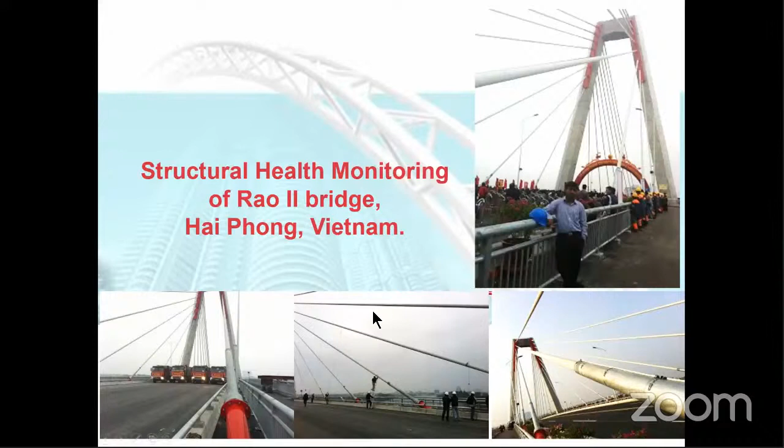The few projects I've listed are the structural monitoring of Rao II Bridge in Hai Phong, Vietnam; the online monitoring system for the Golden Horn Bay Bridge crossing, Russia; health monitoring of the Neva Cable Stay Bridge, St. Petersburg; the new Mariinsky Theater in St. Petersburg; and the Crusell Bridge in Finland.

A few projects in India are the load and periodic monitoring of road bridge OB161 in Baramulla, Jammu and Kashmir, and structural monitoring of a steel truss bridge that is 120 meters span at Bangalore, Karnataka, as well as load testing of the viaducts of metro projects to evaluate dynamic augmentation coefficients.

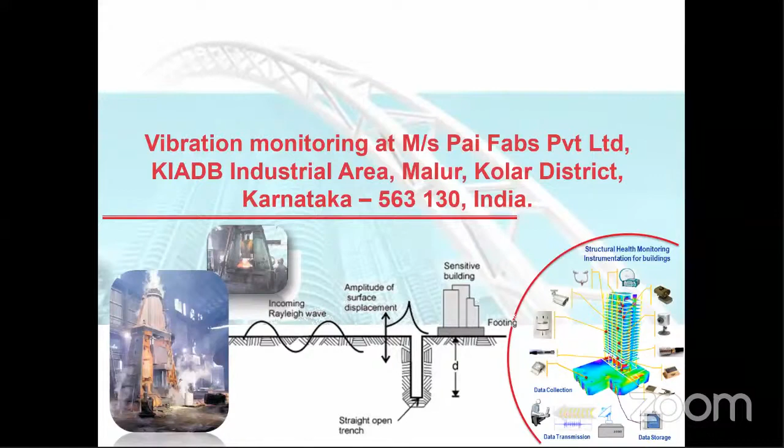Various other vibration monitoring projects in industrial areas like Kolar, Bellary, and various other places in Karnataka, plus a few measurements abroad related to human comfort.

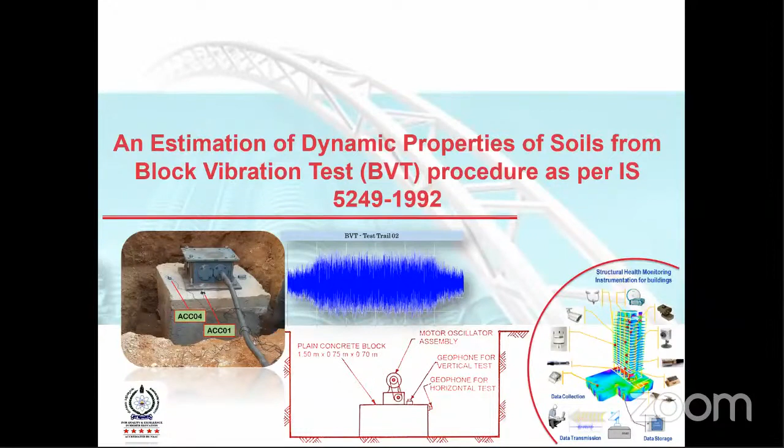Then a few research studies have been conducted at various universities. I've also been a consultant for academic works on free and forced vibration of various specimens, and a few projects on estimation of dynamic properties of soil and vibration related to soil and geodynamics.

These were a few of the projects which I could list, and if there are any clarifications or suggestions required from the participants, I would be happy to share, not just limited to this presentation, but on those projects also.

Today's presentation is on structural monitoring of a bridge, specifically the case study of the significance of monitoring temperature and humidity. The outline is: introduction, structural health monitoring, benefits of structural health monitoring, and the case study on significance of monitoring temperature and humidity, followed by some closing comments.

Although the outline looks very simple, my presentation is going to go at least 2 hours long. I hope your hosting organization and department organizers would accept such a long presentation. If at any point they require me to end, kindly let me know, and I will definitely wind it up at the earliest.

Now, as we all know, the civil industry is evergreen and ever growing. We basically build what we call the living companions to all. Now, during this COVID situation, you would have understood that the only thing that is going to be forever immortal is our civil industry, because your building is going to stand, but humans are always mortal.

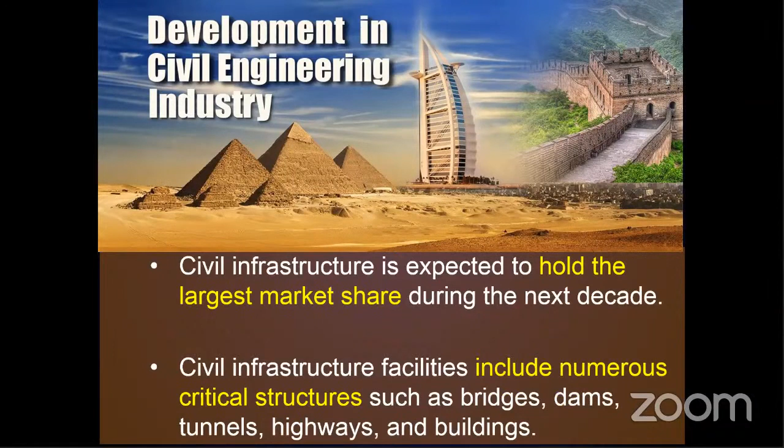Civil infrastructure facilities, as we all know, can include numerous critical structures, such as bridges, dams, tunnels, highways, and buildings. Now, in the construction industry, presently we're in a state wherein, because of the rapid urbanization, there is a need for new construction, and there is a need for retrofitting the existing structures. Basically, we either need to construct new ones, or we need to take care of the aging infrastructure.

Now, as we all know, we've been professors, we've been explaining students on most of the modern complex designs, and the structure being so complicated with a lot of materials inbuilt. So as we all know, the recent development in technology has enabled the modern construction of structures that consist of most complex design, such as complex geometry and conditions, incorporating complex systems such as control devices, composites, built with advanced material quality and supported with sophisticated analysis, design, and rapid construction.

And all these modern constructions or modern infrastructures are subjected to aging, and also subjected to traffic volume.

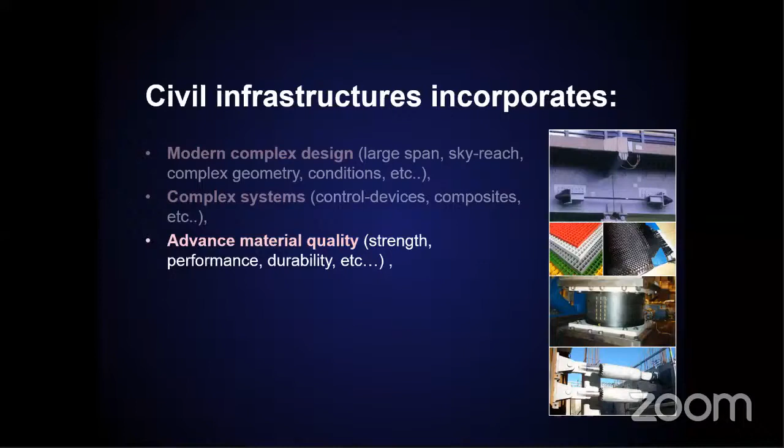I think... you can mute him. Yeah, okay, he has muted. There is audio a little bit low, it seems. Please check your audio. Is it okay? Yeah, fine, let me check on that. Yes, sir, is it fine now? Is it fine? Now it is okay. Yeah, fine.

So we've been able to construct the tallest buildings and the large span bridges. So almost we are reaching to almost 2-3 kilometers span of the bridge.

Now, as you all know, the globe is getting hotter day by day, and the temperature is rising. This is attributed to global warming and climatic change. This is the present day talk.

Now, it is necessary for us to know the terms weather and climate, and these are quite different. Weather events are defined as the state of the atmosphere in a particular location at a particular time, whereas climatic change includes major variation in temperature, precipitation, wind patterns, and other environmental conditions that occur over several decades or longer. It takes more time. So that's the climatic change.

Now, the climatic change is the cause for the structures to be affected, and the climate is changing because of the global warming. The change in climate and weather are linked over the long term, but no single weather event, such as what we had recently, the tornadoes or the cyclone, can specifically be attributed to the changing climate. So that means a single weather event cannot dictate the climate, basically. It takes a long time.

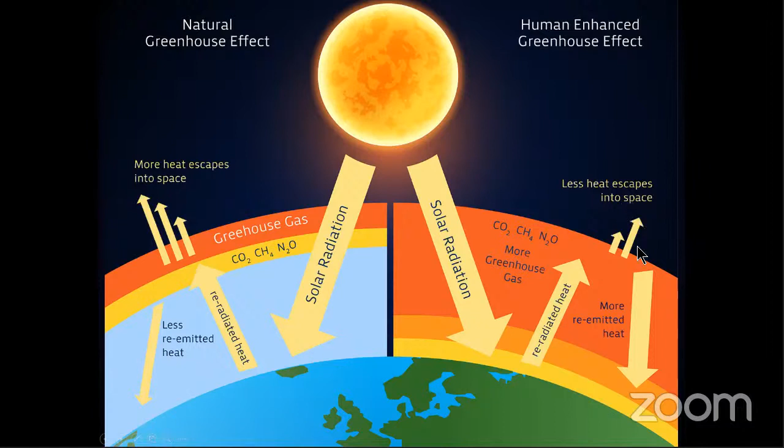The slide will give you a complete picture. On the left hand side is the natural greenhouse effect. The right hand side is the human enhanced greenhouse effect, because of the various greenhouse gases. So the increase in greenhouse gases means there is less heat that escapes into space. Thereby, we have more global warming.

Arrhenius was a scientist who, in 1896, speculated that changes in the levels of carbon dioxide in the atmosphere could substantially alter the surface temperature through the greenhouse effect. He warned that if burning coal doubled the concentration of carbon dioxide in the atmosphere, the temperature of the earth could rise by several degrees. That was the day we got to know the definition of the enhanced greenhouse effect.

Sunlight passes through the atmosphere and warms the earth. Infrared radiation is given off by the earth, and most of it escapes to outer space, allowing the earth to cool. But some infrared radiation is trapped by gases in the air, such as carbon dioxide, keeping the earth warm enough to sustain life. Increasing carbon dioxide increases the amount of heat retained, causing the atmosphere and the earth's surface to heat up. So this is all about the greenhouse effect and the enhanced greenhouse effect.

This causes a problem of climatic change due to global warming. Every sector, industry, or organization is contributing to the greenhouse effect. According to the WHO, a carbon footprint is the measure of the impact that any activity—by a sector, industry, or organization—has on the amount of carbon dioxide produced through the burning of fuels, expressed as the weight of carbon dioxide emission produced in tons. So the sector contributing to the greenhouse effect can be measured by its carbon footprint, based on its carbon dioxide emissions produced.

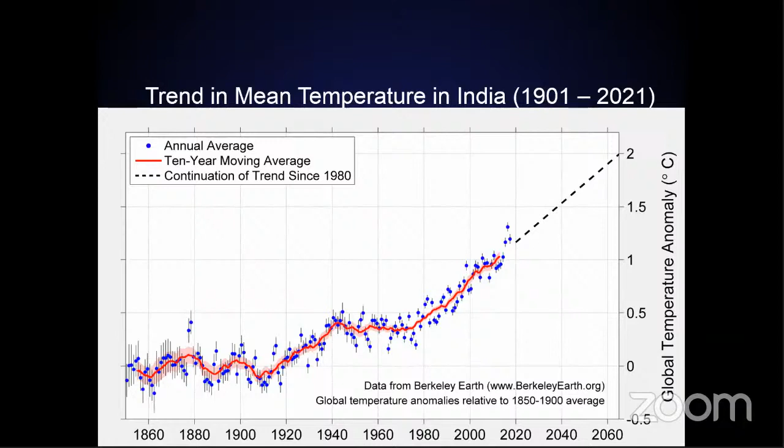Because of the carbon footprint and the increase in carbon dioxide, we've been seeing a constant trend of increasing temperature since 1900. This graph is taken from the Berkeley Earth organization. You can see the temperature has been constantly increasing over time—this is the trend in India.

This is relevant to my presentation, because this basic understanding is important since we are into structural health monitoring. In health monitoring, it's not just about finding how much change has happened, but also getting into action mode—diagnosing the problem and then suggesting something. So understanding why the problem started is of prime importance.

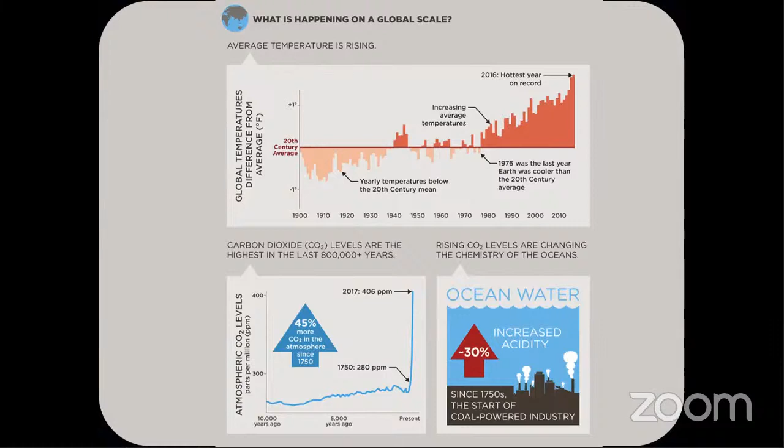Because of the enhanced greenhouse effect, the carbon increase, and the carbon footprints of various sectors, we have a rise in global temperature, which leads to various effects. On the global scale, temperature is increasing, carbon dioxide is also increasing as a major pollutant, and there is an increase in acidity in the ocean water.

As you all know, we are in the present day COVID situation, which is presently being declared as airborne. Now this is going to affect the region, and there is going to be a risk for various sectors - environment, economy, and health sector also. There is going to be a huge increase in the risk involved in the cost, and this would be ever growing.

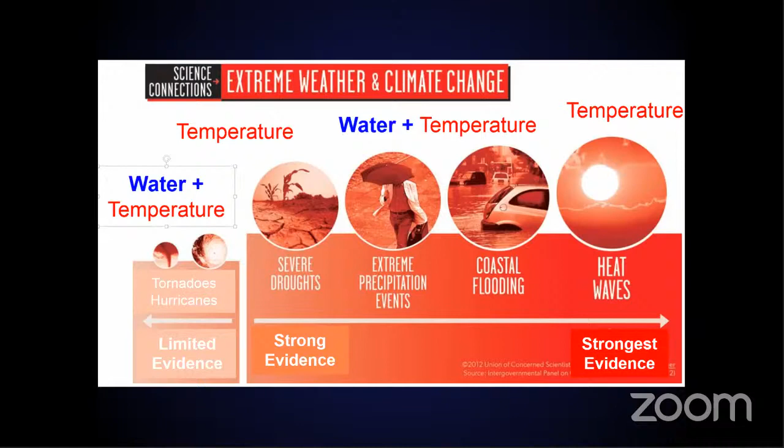Now, most of you would know the definition of a structure. We can take any structure, not necessarily a civil infrastructure - it could be a mechanical or aerospace structure. All are affected by the temperature.

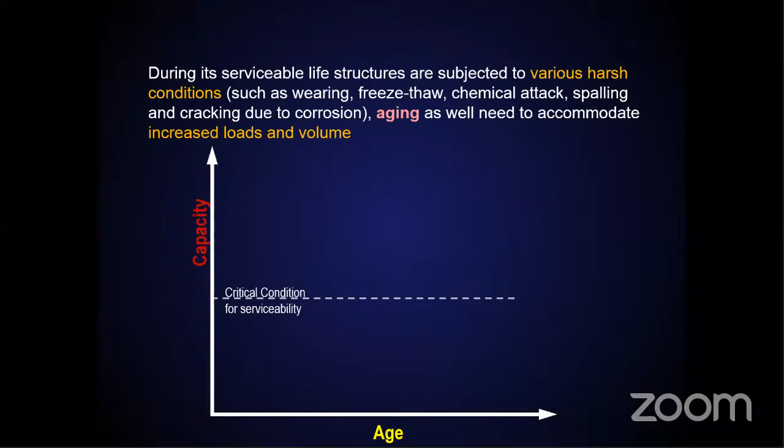The loads clearly show a tendency to increase over the lifetime of the structure. However, if the applied load increases continuously, the deterioration would occur faster. So if the load is increased in an accelerated way, the deterioration is also going to be accelerated, or faster.

As you all know, the load is never constant, the capacity is never constant, because the capacity decreases with age and also with the rate of loading, and it is always changing. Whereas the load is always variable, it's totally uncertain.

So whenever there is variability and uncertainty, these parameters of uncertainty or variation can be best represented by the probability distribution. So the probability distribution curve, if you take at any point...

As time progresses, the demand exceeds the capacity, and it is evident that the time-varying probability of failure increases.

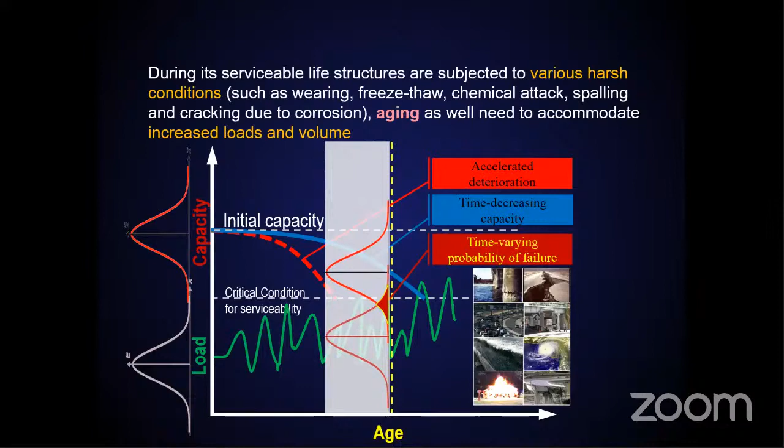As we all know, the design must guarantee the performance, that is the functionality, strength and durability, which is dependent on time. And structures in general are intended to perform safely during their design period.

When it enters service, it is close to perfect, or in agreement with the engineering expectation of the day. Over time, the structure loses part of its initial capacity. As you can see, there is a cumulative damage over a period of time.

When the structure is found to reach a limit of acceptable minimum performance, as determined by routine inspection done by the structural managing team, it has to undergo repair to recover its initial capacity. If this point is neglected, the structure would basically be decommissioned, or it won't be performing well.

As you all know, every structure once in its lifetime should be subjected to some type of extreme event, such as an earthquake or other extreme events. After an extreme event, it is again inspected and retrofitted, and the same cycle repeats. That means after the retrofitting, there will again be cumulative damage, or deterioration of damage.

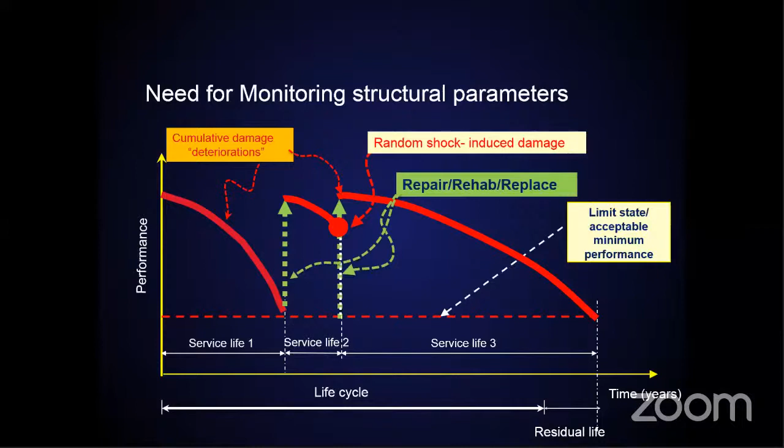As you can see, there is numerous uncertainty involved in every phase. So what is that uncertainty? The X and Y parameters. If you look at the X and Y parameters, you are not definite at what time the rate of deterioration would lead to the decommissioning of this particular structure.

On the Y-axis, we have the performance; we are not aware up to what point it will perform after it is designed, and the rate at which it falls is also uncertain. There is total uncertainty. So in order to extract knowledge or understanding of how this deterioration takes place, there is a need for information.

This information is basically obtained from data that are collected from these structures.

In the present day, there is reactive-based maintenance, which is still a reality. The preventive, or time-based, or condition-based approach is still not being practiced fully. In a few cases it has been practiced, but it is not completely practiced.

The predictive or forecasting-based approach is still the need of the hour. So all this predictive, forecasting-based, or condition-based approach is dependent on the data that is acquired and the information obtained in context with that particular situation. Therefore there is total uncertainty.

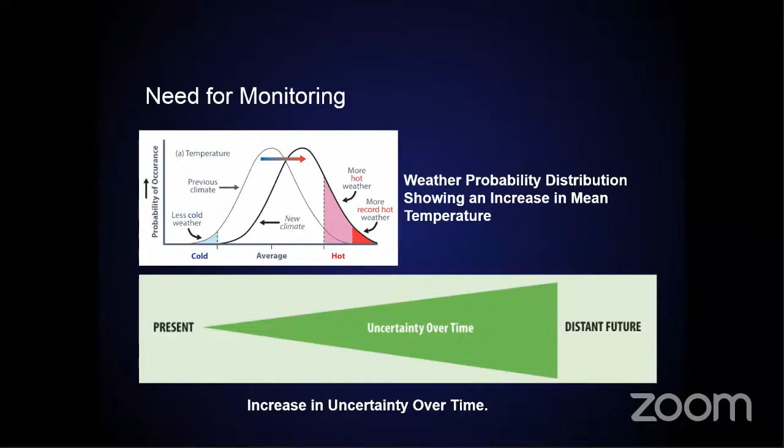As we can see from the slide, the uncertainty over a period of time increases if measured over a long period. The uncertainty of today would extremely increase over a period of time. So when you know these factors, this is a complex situation in civil engineering.

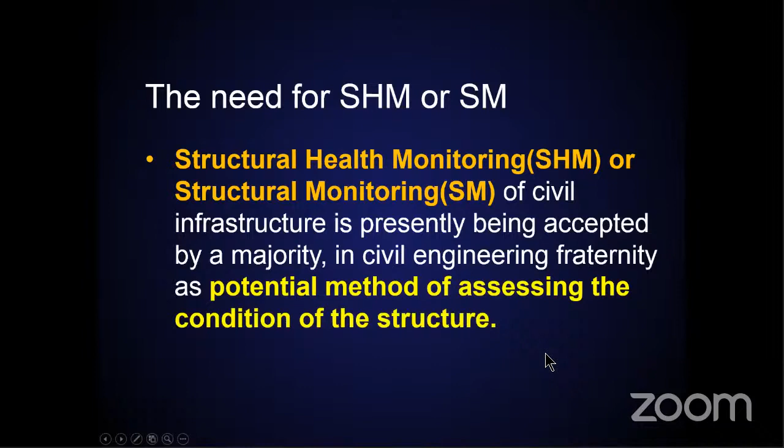Basically, it's presently accepted by the majority of the civil engineering fraternity as a potential method of assessing the condition of the structure. The development of structural monitoring technology is basically for surveillance, evaluation, and assessment of existing and newly built structures, and it has presently attained some maturity. That means extensive research has been conducted and it is being implemented on site.

And presently, people have been using, because of the low cost IoT technology that is being adopted in structural health monitoring.

For those people who are very new to the subject, the analogy is the process of acquiring and analyzing data from onboard sensors and measuring techniques to determine the health of a system. It could be as simple as monitoring the health of an individual.

Similarly, you monitor the health of your civil infrastructure. Nowadays everybody is aware of monitoring because we've been constantly monitoring people, and the media helps us monitor. Even if you're in a bad or good state, you try to monitor so that you remain in a positive state of mind.

As you know, there's a parallelism between medical activity and SHM—different phases of life. There's birth, and during birth you go for monitoring, called process monitoring. There's regular routine health checkup, whether you're in sound health or not, and the same type of monitoring can be done. When you're in deep illness or close to death, there's clinical monitoring, and similarly there's damage monitoring when it comes to structures. That's the parallelism between medical activity and SHM.

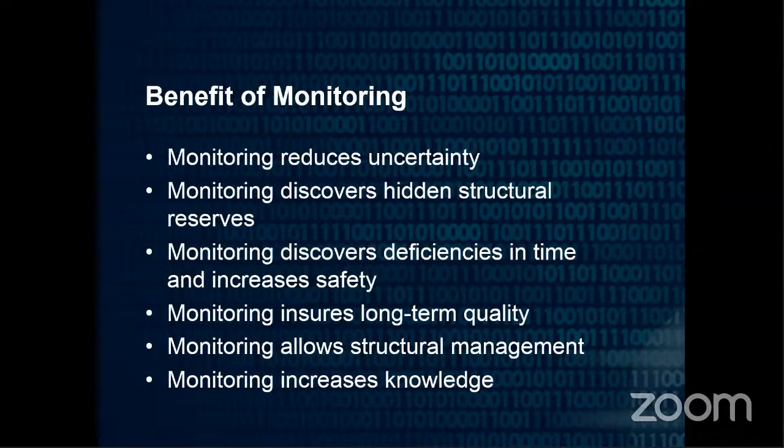Monitoring also increases knowledge, because you create a strong database for others to work on and develop their models, and share those models with academics to get into the practicalities and into codes of practice. So there are various benefits of monitoring depending on what you're monitoring, and these benefits can be easily seen when reading some articles.

Now the definition: structural health monitoring, or structural monitoring, is the technology-driven automated solution whereby sensing devices are installed and remain in place on a structure with the intention of capturing structural data on a continuous basis over time, for the purpose of objectively and accurately assessing structural performance. So we use sensing devices that are installed and constantly monitored.

Basically, structural health monitoring is the combination—it's called Civionics. It's a combination of structural engineering, civil engineering, with electronics. It includes structural engineering and data science. As you know, Civionics is a new term coined in 2003, applicable to the application of electronics in civil engineering.

Structural health monitoring can be applied for usage monitoring or operation loading, to collect operation loading data, health monitoring, and presence or quantity or performance variations. It could also be maintenance monitoring—reactive, corrective, prevention, or predictive monitoring. So whenever you have a maintenance program situation, you would call for structural health monitoring.

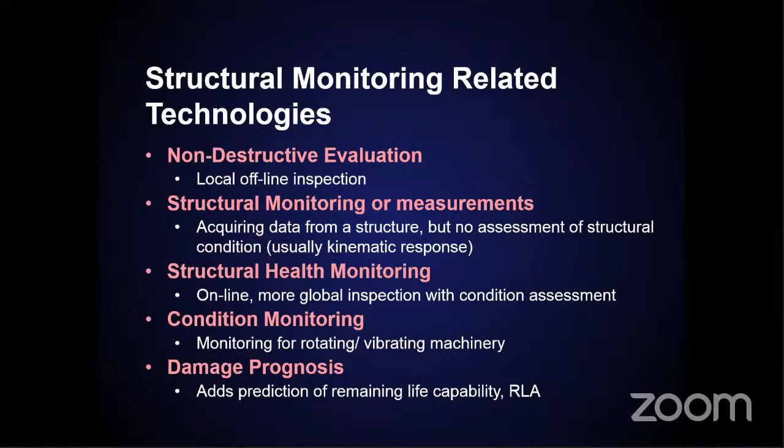Each monitoring project has its own peculiarities, and although it is possible to standardize most elements of the structural monitoring system, each application is unique in its own way, and they are combined. So the classification of monitoring is basically a combination of various things.

Since every project is unique and peculiar, you try to combine and make it a topic. Let's say, in the present day topic, highlight it as structural health monitoring of structures and the significance of monitoring temperature and humidity. That doesn't mean I'm an expert in the various other fields, or that I am aware of other things.

This particular field has its own wings, and the few people who have worked on certain projects could only talk on those projects and would be expert in that project. But it is quite a complex and vast subject. So whenever you get involved in a particular project, you try to know much on this, and it basically gives you a basic idea of the other monitoring schemes.

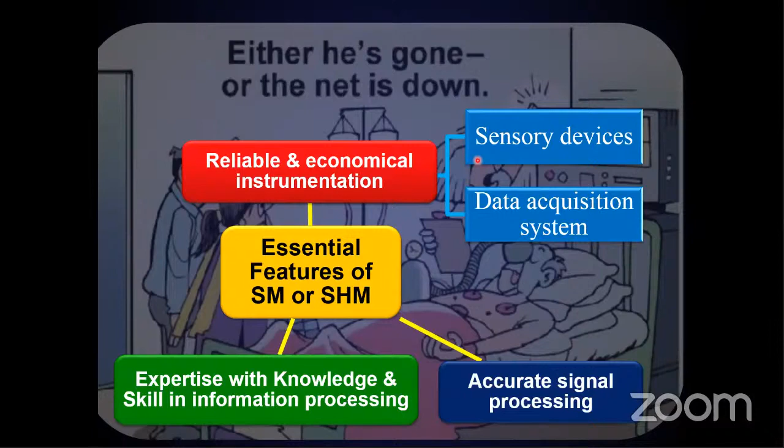Now, the components of the structural monitoring scheme - I would try to go fast because these are the basic things, so from henceforth I'll be a little fast. I'm getting back to my case study and I'll go slow over there.

As you can see, the modern structural health monitoring system will typically consist of six common components: the structure or system that needs to be monitored, the sensors placed onto the system, the data acquisition systems that acquire data from the sensor, the data transfer and storage, the data management, and the data analysis and diagnostics. These are the major components. From these components, we try to find, diagnose, and analyze, and then use that data to successfully provide the solution to the civil infrastructure.

And as you all know, the monitoring scheme is basically a networked, well collaborated, multidisciplinary activity. The monitoring system is a multidisciplinary system integration approach, wherein you have various components and hardware from various discipline fields that are integrated and combined to form one particular reliable system. So the success of the monitoring system or the monitoring technology depends on how well we have been collaborating with various departments.

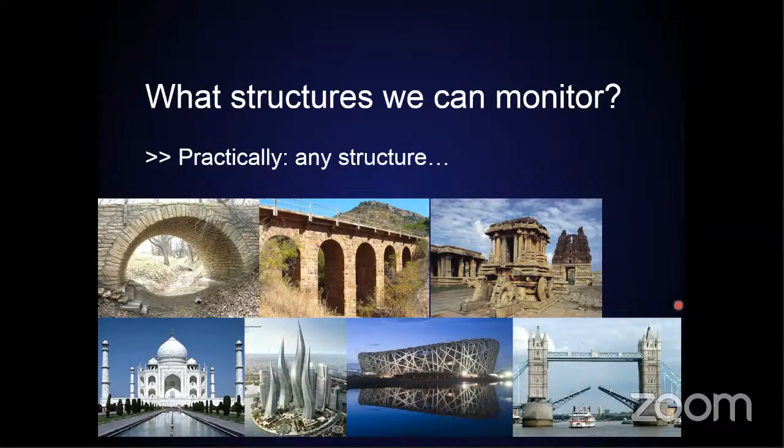Now the first component is the structure. Most of the questions asked is which structures can be monitored. As I've been presenting at various conferences, I've been told to define a few basic things, so I try to include this. Practically, we can monitor any of the structures, be it new, old, micro, macro, or any scale. It could be on Earth or in space, a single structure, a complex set of structures, the whole city, or anything - a temporary structure or a permanent structure. So practically any structure can be monitored.

At what stage do we need to monitor? As in the case of health monitoring, we can monitor at the happy stages, and when you're really worried, you go for diagnostics. And sometimes when you're critically ill or in a very bad state, you go for monitoring.

Therefore, by the same analogy, you can monitor structures at any stage - beginning from the design stage, model testing stage, construction stage, commissioning stage, in-service stage, maintenance stage, retrofitting stage - before and after retrofit, whether the retrofit is effective or ineffective - and the mobilization stage, when you mobilize one structure from one place to another, or lift structures from one level to another. You need to monitor every component of it if there are any stresses being induced, so you monitor before and after it's been mobilized.

Demolition - whenever you go for a demolition, you need to see whether the surrounding environment is affected, whether the structures surrounding it are affected. Therefore, you need to monitor before and after the demolition. So basically, in the life cycle of a civil infrastructure, you try to admit a few stages of monitoring.

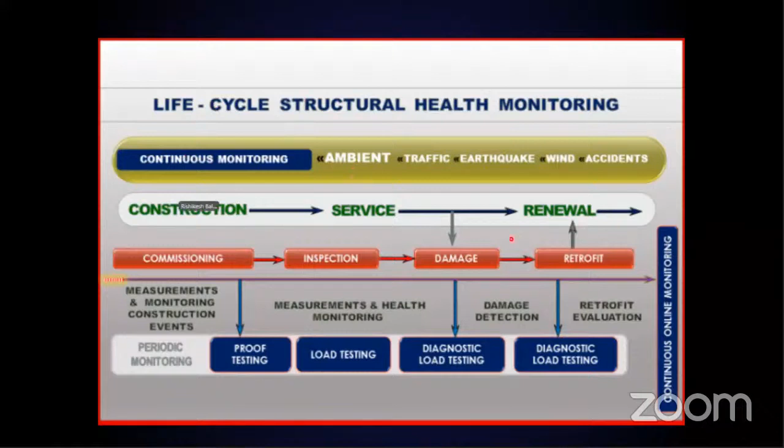Now, which of the components or sections of the structure need to be measured? You can measure the whole structure, or you can measure one component of a structure. When you're measuring the whole, you're considering the whole structure in your analysis - that's called global monitoring. When you consider a portion of a structure to understand its local behavior, that's called local monitoring.

The second thing is the sensors. Now, what is a sensor, or what are the types of sensors available? Electronics students are very much aware of it, and nowadays every individual is aware about sensors because you're using smartphones, which have got various sensors. So it's a device for sensing a physical variable of a physical system or an environment - that's a book definition of it.

And the sensors are there to collect the data. Now, the sensors sense the changes in the physical variable of a physical system or environment that could lead to damage. Now, understanding damage is very important.

Damage is defined as a change introduced in the system which adversely affects the optimum functionality of the system, either currently in use or in the future. So damage is basically a change introduced into the system which adversely affects the optimal functionality. Basically, the damage or system change is defined as a change in the material property, the geometrical property, or also the boundary conditions or system continuity, which adversely affect the system's performance. So the sensors sense the data, and the change in the data would define the damage - that's a basic definition of damage.

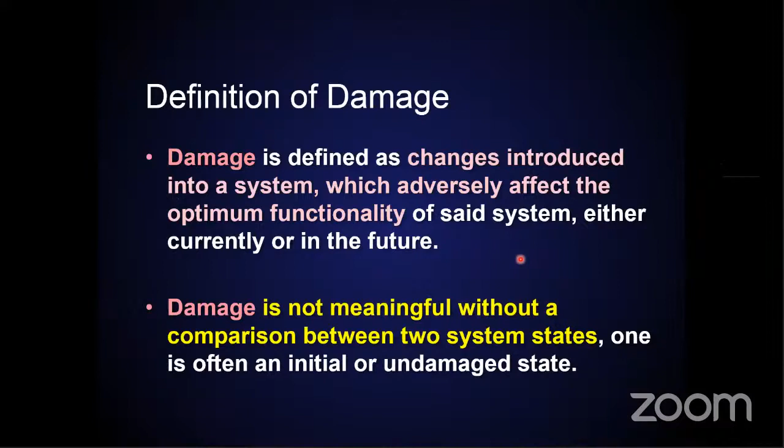Now, one must understand that sensors cannot measure damage. In the initial days, when we used to go for marketing or talk to clients, they had an idea that a sensor could measure damage and we could tell whether the structure is safe or not within a fraction of a second - once the sensor is in place, whether you can find if the structure is damaged or not. But this was the situation when I used to talk to my clients earlier, wherein we couldn't give an explanation, because if I give an explanation, I lose the project. If I don't explain, I'll be doing injustice to my job.

So as you all know, the SHM sector is still in the developing stage, because there is a need for a lot of skill sets to be provided. These seminars or webinars will always help candidates get the information and knowledge, and further when they apply it in their labs or work on some projects, they'll definitely understand what amount of skill set is required for structural monitoring.

So basically, the damage assessment is a feature extraction through signal processing, and statistical classification is necessary to convert the sensor data into damage information. That's very, very important. So we must know that sensors cannot measure damage, but the damage assessment is by feature extraction - we need to get the information from that data.

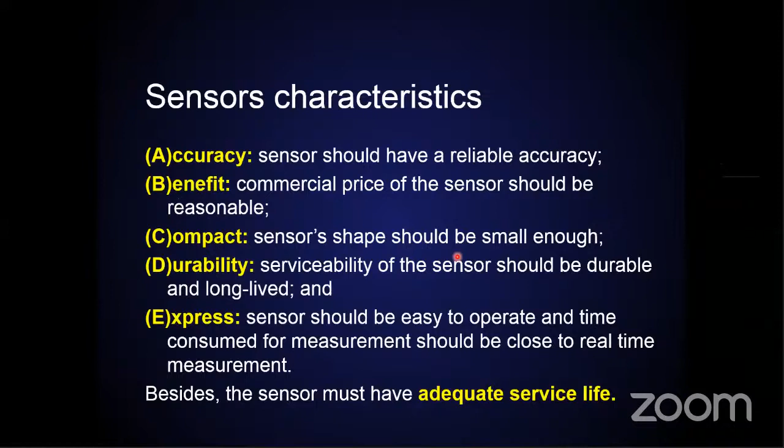Durability, the serviceability of the sensors should be durable. Express means the data operation and accuracy should be fast, high rate, and it should also provide real-time measurements. Once we are dealing with civil infrastructure, it will also have adequate service life equal to that of the civil infrastructure.

So the types of sensors available in the market can be classified as surface attached, which could be glued, bonded, or welded. It could be contact or non-contact. So basically, you have contact sensors which are surface attached, and some are embedded, or embedded at a specific region, such as the damage or where there's expansion or a crack.

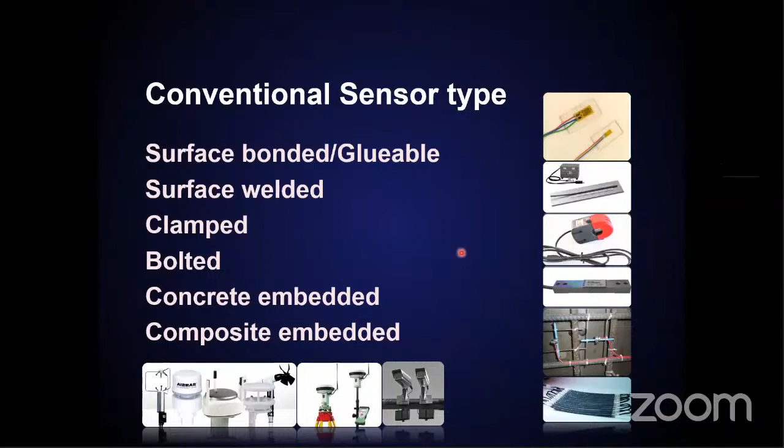The conventional sensors are electrical signal based, or basically traditional electronics based. These are surface bondable, gluable, weldable, clampable, boltable, concrete embeddable, and composite embeddable. These are the conventional type of sensors available by various suppliers.

And these are a few of the sensors that I've been using extensively in my earlier projects. So these are the sensors that are commercially available, and these are the ones I've worked on.

Now, the conventional sensors have limitations in evaluating the long-term behavior, and that includes being very sensitive to electrical noise. This noise doesn't allow you to understand the signals properly coming from the sensors, and this is always an issue. Also, these sensors degrade with age.

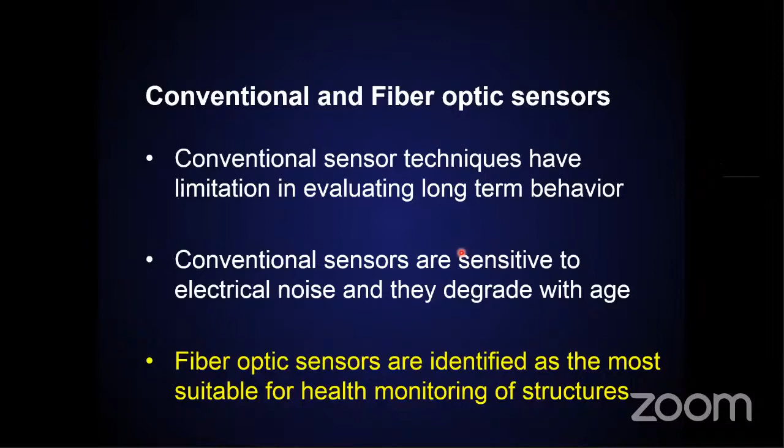Presently, fiber optics are identified as the most suitable for health monitoring of structures. As you all know, telephone lines are being converted from conventional lines to fiber optic lines, so the flow of data is quite reliable and fast, and the rate of data transfer is also increased.

Now, the advantages of fiber optic sensors are electromagnetic interference immunity, so the electromagnetic radiations do not interfere and do not create any noise. It is lightweight and very small, as you know, small size for hair. It has very low losses over long spans.

Maybe it goes with tens of kilometers. High temperature and ionizing radiation tolerance, stability and durability against harsh environment, no local electrical power required at the measurement point, high resolution, high bandwidth of signal, and high sensitivity.

So the fiber optics are also commercially available these days, and these are again classified based on surface bondable, gluable, weldable, boltable, clampable, and then concrete embeddable and composite embeddable.

So based on your particular situation or project, you may have to define what type of sensor you require, and there are suppliers who will suggest or help you understand the sensor and its limitations, as well as give you the right consultation. As I said, this is a multidisciplinary activity.

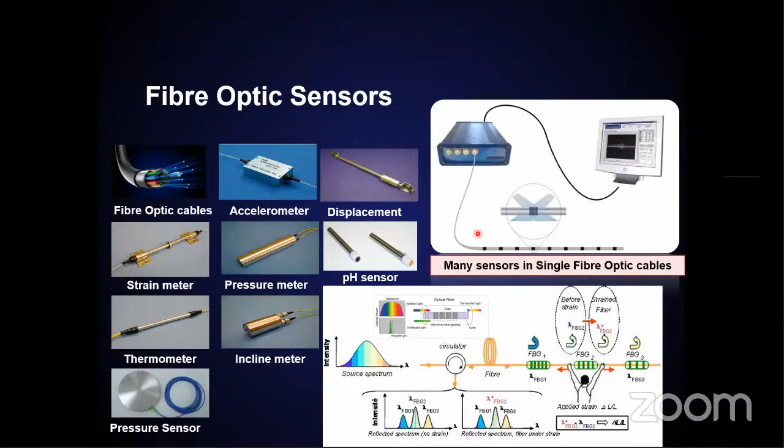You may not be an expert in all the fields, but you need a lot of collaborated people with various domain expertise to come to a complete solution for this particular structural monitoring scheme. So these are a few of the commercially available fiber optic sensors extensively used in the projects.

Now, how many sensors to be installed is one more question, and it depends on the requirement, the budget, and the time. The budget depends on the resources, which include the materials, the people involved, and the time involved. The higher the resources utilized, the higher the cost, because the data coming from the monitoring scheme is going to be humongous, very large.

So the definition of the levels of sophistication can be described in various levels: level 1, level 2, level 3, level 4, and level 5. The first level is existence. The first question that you would have in mind is, is there a damage in the system?

This could be answered by the level-wise detection of damage. At the first level, you provide a few sensors and can say there is damage in the structure. The next level is locating the damage, which is quite a complex thing—you need to process the structural or sensor data to find the location of the damage.

That goes to the second level. Then comes characterization of the damage—what is the extent of the damage and how severe is it. Once you understand these things, level 3 becomes a little more complicated. You need more data processing, and then you need to analyze and interpret the data. So that's the third level.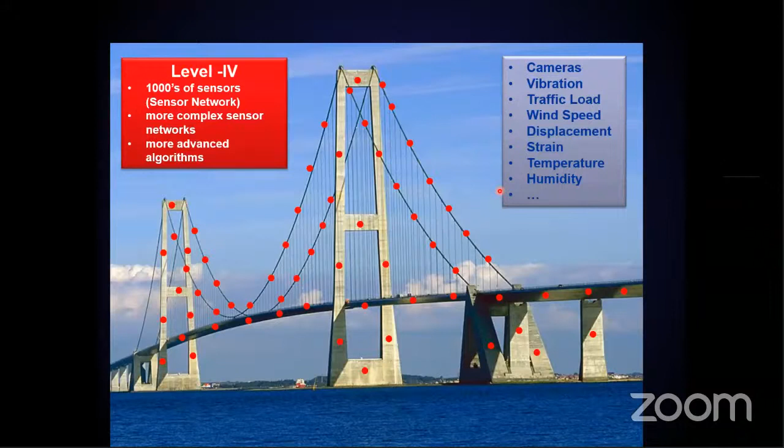Whereas when you want more sensors to get a more complex analysis of the structure, the level of analysis is quite high. Therefore the number of sensors is going to be high, meaning more advanced algorithms are required. More data comes in, and a lot more time is required, which becomes a costly affair. Definitely this is a doable job, but it depends on the situation and the need for it.

The third component is the data acquisition system. Data acquisition systems can be classified as portable, fixed, and handheld, or also defined as online, offline, or real-time—these are the various classifications. In the market you get data loggers, data acquisition devices, and data acquisition systems.

The classifications and their benefits are shown here, but I'll skip these slides and just introduce you to these systems. These are a few systems—portable, handheld, and online monitoring systems that are permanently installed onto structures. I've been working with these systems.

Data transfer always takes place through cables and the network of sensors. Sensors are networked to the data acquisition system, which is centralized and will also transfer data to remote servers. So you have the centralized data acquisition system, with a parallel connection to the sensors. This type of acquisition system is used in labs and in small projects.

But for large projects, when you have a minimum of 10 to 20 sensors onto a structure, the number of cables running onto the bridge itself becomes quite high. And if you're monitoring a small, flexible system within the lab trying to measure damping, because of the weight of the cable and the sensor itself, you won't be able to get accurate results.

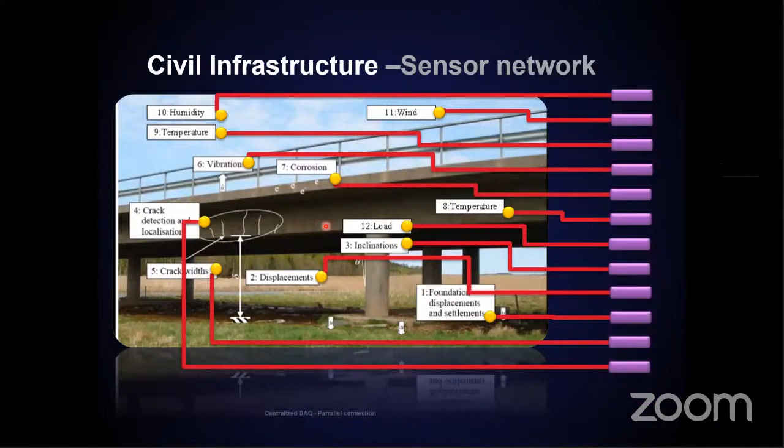So the number of cables that goes, because of the sensors and the number of cables, the model parameters, there is going to be different and it won't give you the right results. So therefore there are a few developments that have taken place. The distribution data acquisition system can be converted to a series connection, which would help in projects that are large span structures, or structures which are short span but need a minimum number of cables running onto the structure.

In that scenario, we need to go with the distributed data acquisition system, that is, a series connection, or bus topology. So this type of instrumentation is being developed, and there is also presently wireless technology, where at every sensor you have a node, or you have a centralized distributed DAQ, or data acquisition unit, placed very close to the sensor itself, and that transmits the data to the remote server or remote station.

Therefore, the data are going to be stored. So you can have various types of networking that can go. It could be cabled, it could be wireless, and there are different types of wiring. It could be fiber optics, it could be normal coaxial cable, shielded, unshielded. So there are various types of wired and wireless networks that have been extensively used, and you can go with various combinations of networking.

So basically these data are networked, and then the data are transferred to the data acquisition system. From the data acquisition system, it moves to the remote station. So basically there is the bus topology, or series networking DAQ, which I was previously working with in my previous company, based on networking sensors in series, which has its own advantages and its own limitations. This was extensively used, and most of the projects I'm going to talk about today, I've used this type of networking scheme.

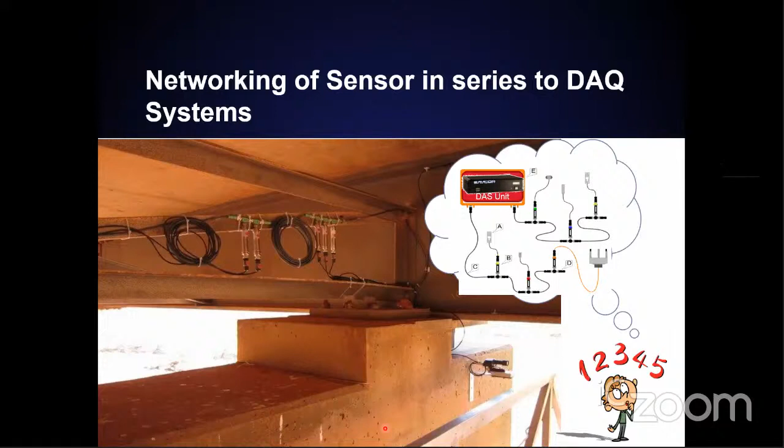So this is inspired from the networking scheme that is there in fiber optics, wherein in the fiber optic scheme you have multiple sensors in one single strand. You have multiple types of sensors, as well as multiple sensors in one particular strand, and that can be monitored and can go for a long run.

So how much data is collected? As you all know, we presently have two situations in structural or civil engineering infrastructure. One is that the structures are very large, so the number of sensors is going to be quite high, and because the number of sensors is high, we have a large amount of data coming from sensors spread across the whole infrastructure.

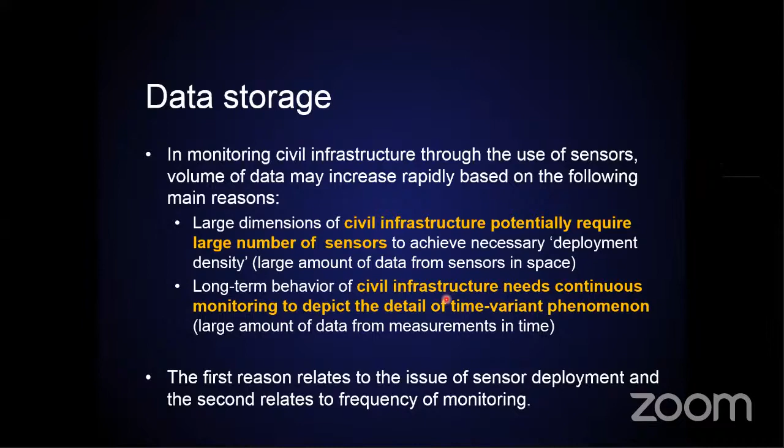So both of these have two issues. The first relates to sensor deployment, that is, more sensors are deployed onto the civil infrastructure. The second relates to the frequency of monitoring, which is that we need to monitor continuously at a particular rate, and the data has to be monitored for a longer duration. So how much data is stored, that's the huge thing. These days we are in 5G technology, and the data transfer is going to be almost 100 times that of a 4G network. But where are these data transferred?

As you all know, your phones these days are enhanced with much more memory, and the photography resolution has increased. You have a 48 megapixel camera that is storing each picture about 13 MB or so. Similarly, when you have a high rate of data, that means a high resolution of data, or the number of data transferred per second is high.

Therefore, the storage is also going to increase, and they need the humongous data that is required. So if you take the present day situation, the maximum bit resolution is going to be 24-bit, while the practices in the labs are 8-bit or 16-bit. But here we have high resolution bit samples of 24.

Let's say there's one channel, the x-axis vibration data that is being monitored, and you're monitoring for about 60 seconds. Per every second, you're collecting 100 data points. Let's say that's called sampling. So per every second you collect about 100 samples, and you can see how much data is being stored.

So I'm collecting 100 samples, and you can see per minute, per every 60 seconds, if I'm collecting the data per second taking 100 samples, that means you have about 17 to 18 kilobytes. And if I'm collecting per year, this is just for one channel, and for every sensor you'll have 3 channels, or sometimes 2 channels. So you can understand how much data is going to come into play, almost in MBs.

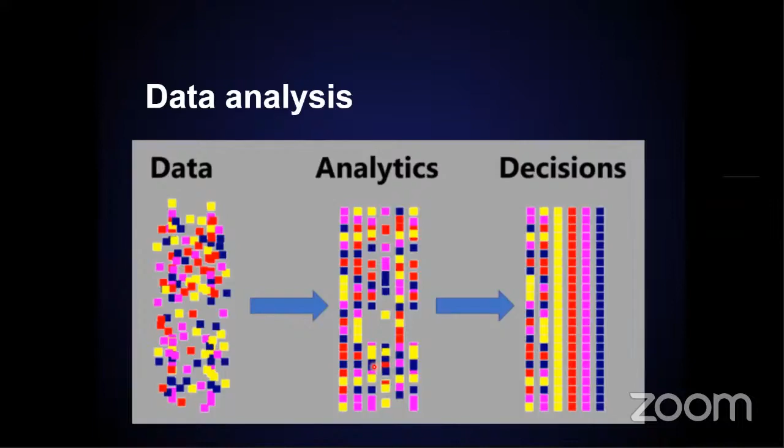Therefore, your end user, the people who are going to take decisions, or people who want to get into this business, like those attending the seminar, I'm not providing you all the basic raw data as we have done earlier and how we have done it, but rather you look for data that is simple to understand, so that you can make your own interpretation.

But this many things are getting into play when we are doing a structural health monitoring business. So next is the data visualization. Data visualization, as I said, has to be as simple as possible, and the large amount of data should be captured in the most simplest way, so that you get the most complete understanding of that particular situation.

Utilizing the structural monitoring tool can give you more time to focus on data interpretation, evaluation, and action, with less time spent to acquire it. In the traditional approach, you need to go onto the site and collect data, and at every specific interval keep monitoring, a calendar check. You need people moving about collecting this data, and you would spend so much time on just that. But these days, implementing structural monitoring schemes gives you more time for interpretation, evaluation, and taking further action.

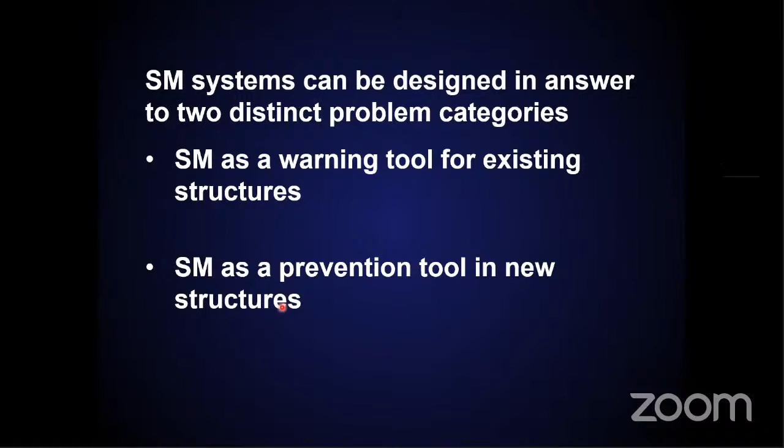Now, the significance of monitoring temperature and humidity. I will touch upon this particular topic. The temperature and humidity sensors are the most commonly used environmental sensors in any structural monitoring scheme.

So all this while I was talking about what is a monitoring system, now I'm going to look into only two specific things, that is temperature and humidity monitoring. This is extensively used in most projects, and I've been using this technology for a while. Humidity sensors are also sometimes called hygrometers.

Whenever you're monitoring structural parameters, you have two types of temperature in structural engineering or civil engineering: the ambient temperature, which is the surface or surrounding temperature, and the structural temperature. Structural temperature could include the core temperature or the surface peripheral temperature - the outer part that is in contact with the sensor when it touches the body of a structure.

As you know, climatic change is always rapid - the weather change and the temperature of the ambience changes drastically and is quite dynamic. Whereas the fluctuation of the structural temperature is going to be a little slow, or in the core, relatively very low or constant. Both of these are measured in Fahrenheit and Celsius. So whenever we talk about monitoring temperatures, we can monitor either the ambient or the structural temperature, and structural temperature includes surface as well as core temperatures.

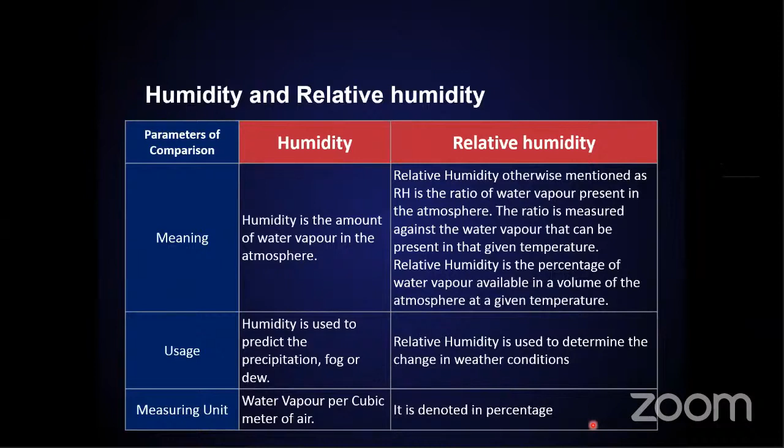During the COVID-19 situation, all of us understood the importance of monitoring temperature. Thermal screening took place at every corner and every individual house. Thermal scanning at security checks and thermal screening are the first step to detect fever and the first preventive measure towards isolation. Once detected, the constant monitoring of the isolated person is important - this is the importance of temperature monitoring.

Temperature monitoring has really helped people understand whether they're COVID positive or negative. It also gives you an idea of how well you're coping with the situation when in isolation, and this has been extremely well understood - this is what we learned during the COVID situation.

But if you look at the widely searched data during the COVID-19 lockdown, one of the most searched temperature-related topics was the ideal temperature to cook chicken in the oven. Many friends who were locked at home knew the importance of monitoring temperature when sick, but few of them were actually sick - they were quite happy being isolated. If you look at the search engines, the most searched temperature query was the temperature to cook chicken in the oven, because most of them wanted to become good cooks - this was extensively searched.

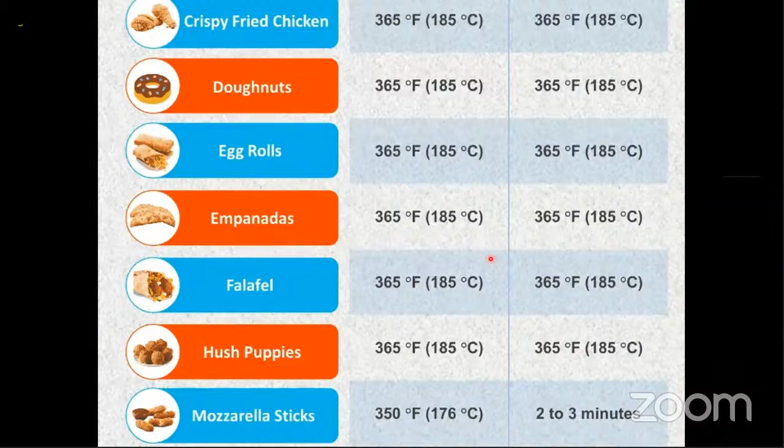So the temperature is quite important even in your kitchens. Maintaining the right temperature for the right cooking purpose is important. I added a few of those because I was looking for the most searched temperature during COVID, and I think this would be helpful for those experimenting on cooking. I would emphasize that you look into the importance given to temperature. When you cook at the right temperature, you get the right dish. If you don't cook at the right temperature, you won't get the right dish. Similarly, if you don't monitor the temperature, you will end up elsewhere. So temperature monitoring is very, very important.

Now, temperature measurement is not new to a few of us. We were in the 90s, there was a movie called Predator. Temperature monitoring was done by these aliens. The scanning of temperature was done by this alien on the captured human being. It could sense, it had infrared vision or infravision.

I will just run through the clip. You can see that in the COVID situation, as you all know, most people were asked to go for scanning, but this scanning is not new to those who have seen this movie, so they would have understood.

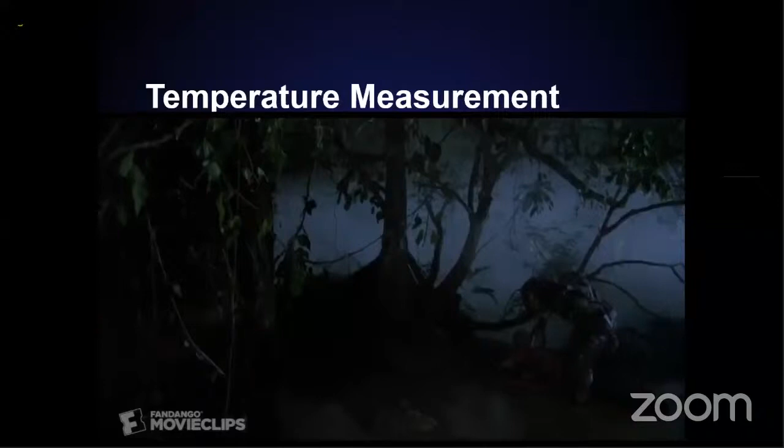Now the present day situation is that initially a few people were grabbed and scanned, and progressively most of them volunteered themselves to be scanned for their temperatures, and presently we are all automatically scanned for temperatures. That's the situation we are in. So slowly we are progressively moving towards automatic scanning for temperature.

Similarly, structural health monitoring is becoming automatic, meaning sensors are implemented in the structures and are automatically scanned over a period of time because of low cost IoT technologies. The monitoring devices and technologies have improved over time, and temperature measurement, which was earlier quite different, is now becoming faster, accurate, and smart.

Now you can use your smart mobiles with an attachment to it. You can also screen the thermal ambience. This has been extensively used in various schools abroad, in most advanced schools.

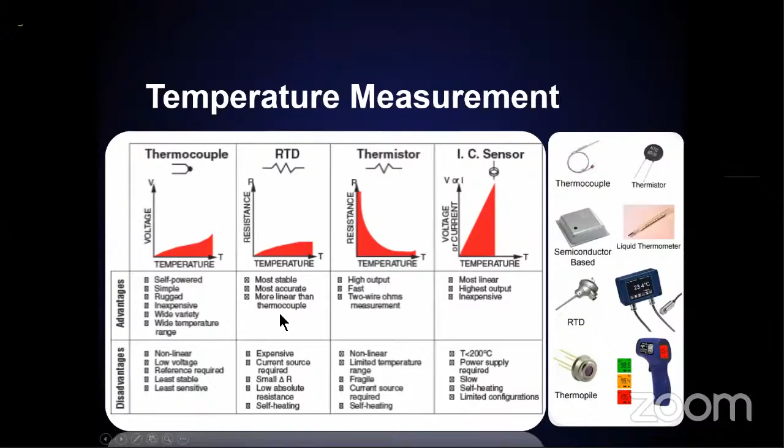When it comes to temperature measurement in civil engineering, the most commonly used temperature sensors are thermistors, thermocouples, RTDs, and IC-based or semiconductor-based sensors. The slides provide various advantages and disadvantages of using various types of temperature sensors, but the thermocouple and the thermistors are extensively used in most of the products. Now, when it comes to humidity sensors, there are three common types.

You can talk to some electronic guys or the sensor department, they'll give you a complete understanding of these and their limitations. Capacitive, resistive, and thermal based sensors are extensively available and presently available in the market. The development of humidity sensors is going at a faster rate. These are data I've got from people working in this sector, and there is a huge development taking place on this particular sensor. So that is extensively used, that is the humidity sensor.

So you have various types of sensors. It could be optical based, acoustic based, and electronic sensors. We see most of them are still in the development stage, and a few of them are already in the market. Now, most of the time, the temperature and the humidity are measured together.

We know that in a COVID situation, we used to measure the temperature, and humidity is measured in most situations and places in order to have complete ventilation and aeration. Therefore, both of these combined help you understand the potential effect of heat index. The table provided indicates the possible complications at varying levels of heat index values obtained from various resources. You can refer to Wikipedia mostly. The heat index is a temperature equivalent that is experienced by a human as a result of air temperature, relative humidity, and wind speed.

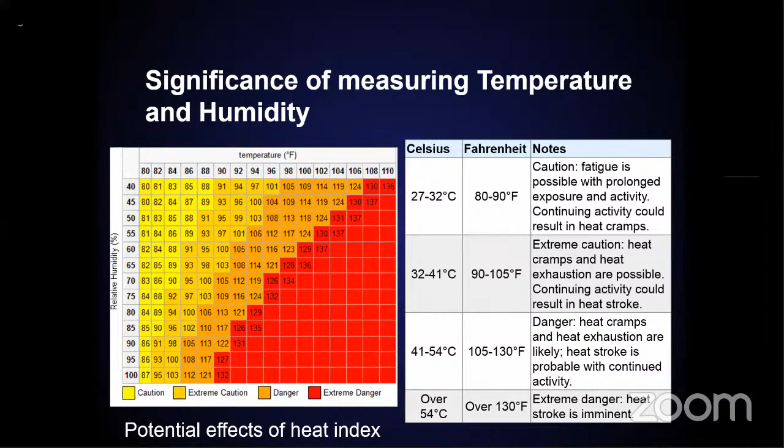The significance of measuring temperature and humidity is completely defined in the Indian standard. Whenever you are doing experimental tests or lab assessments, there is a clause given in IS 196, published in 1966.

It is an Indian standard on atmospheric conditions for testing. It very clearly states this, and ISO books also state the same, so you can refer to this for the importance of temperature and humidity.

If you have worked in various sectors like aeronautics, automation, defense, energy, telecommunication, biotechnology and other fields, you'll have a fair idea on temperature and humidity testing. This testing basically determines how components or the complete system behave in a severe environment involving elevated temperature and high or fluctuating relative humidity.

The test can be static or dynamic, meaning there could be varying temperatures or varying cycles of both temperature and humidity, and this type of testing is done accordingly.

Most importantly, the 85-85 test, also known as a damp heat test, attempts to simulate 20 years of moisture ingress into a given product. If you do this particular test, it gives a rough idea of the aggravated or accelerated 20 years moisture ingress testing.

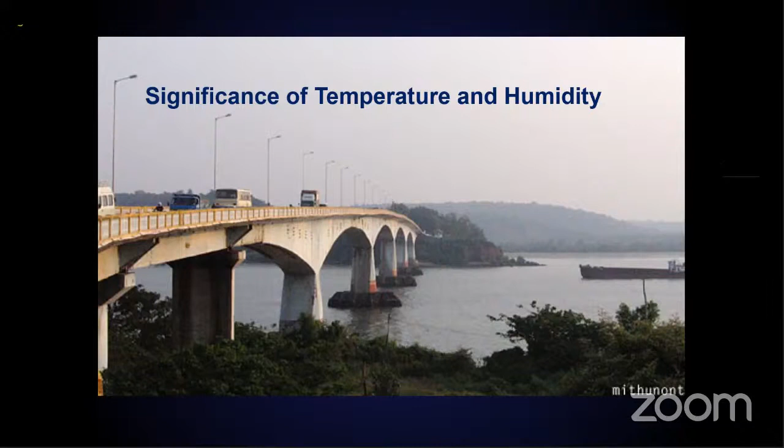So this is one of the structures that existed in a very highly corrosive zone, and most of you have already taken a guess of it. This particular structure was in the highly corrosive region, and because of aging and the highly deteriorating process, the structure was highly degraded. Because of the degradation, there was extensive retrofitting done, but even though the structure is already in the worst situation—highly corrosive zone, highly humid, and high temperature—the choice of retrofitting is also important, and you have to take care of temperature and humidity.

But in this particular situation, when I had the opportunity to visit the site, we were supposed to provide some services—structural health monitoring—and I could see that it was post-tensioned. External post-tensioning was applied for the retrofitting scheme. But anyway, that's the only option they had.

But this was also, as you all know, prone to pitting corrosion because the post-tension scheme is in the highly corrosive zone. Exposure of metals to moisture, especially sea salt or sea water, or high humidity at high temperature, will also increase the rate of corrosion.

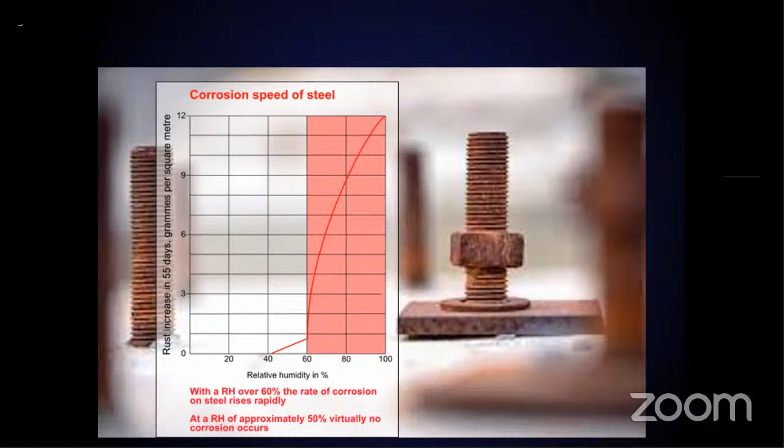Now you should also be aware that the rate of corrosion is dependent on humidity. With relative humidity over 60%, the rate of corrosion on steel rises rapidly—that's a well-known fact. At around 50% RH, virtually no corrosion occurs. But you also see the temperature: as the temperature rises, the rate of corrosion increases, as RH and temperature are interdependent.

So basically, you have relative humidity—here at 100% relative humidity, you see what's happening with water in the air—and then temperature. Because of the temperature, we can see that corrosion also increases. Therefore, these are the major contributing factors, and temperature and humidity are of prime importance when you design civil infrastructure.

Now the next question that comes to mind is: don't they have surface treatment? Yes, they do have surface treatment, but these sealers or cures, which are extensively used, also depend on the temperature and humidity level, because their efficiency depends on those conditions. If you don't take care of these things, your sealant is not going to bond properly, and there won't be any proper effect. So temperature and humidity levels are also important when using the proper sealant.

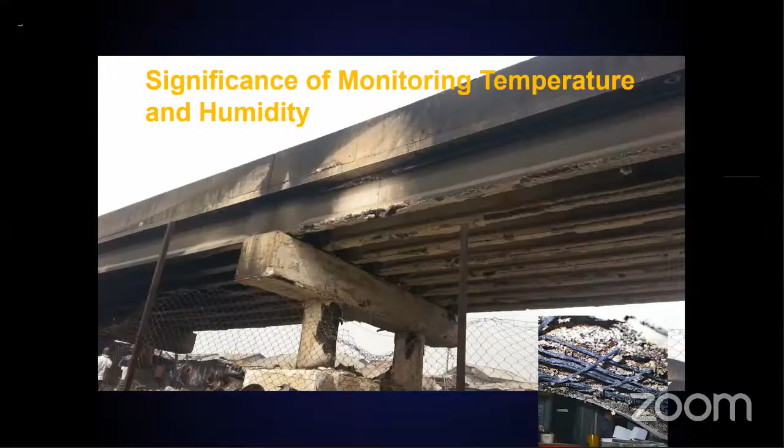This is because whenever you have temperature between 150 to 250 and above, that is 400 degrees, the calcium hydroxide of the cement dehydrates and creates water steam, which tries to increase the pressure, and thereby it pushes whichever is the weakest section. Therefore, you basically lose out the concrete on its surfaces.

So this explosive spalling is dependent not just on the fire temperature, but also on the RH, the relative humidity, as well as the temperature that the structure is subjected to, and the water content that is there within the structure. This shows the importance of temperature and humidity.

This is one of the bridges in China, built in almost 2013. On the day it was built, there were a lot of cracks formed, about 200 to 300 cracks seen underneath the bridge, and they were all superficial cracks. But there was a huge research investigation done.

It was found that due to the relative humidity and temperature, more shrinkage strains changed because of the temperature. They concluded that the humidity effects on shrinkage is the main primary cause for these cracks. That is, when the temperature rises, moisture in the concrete diffuses more rapidly as humidity descends, resulting in larger concrete shrinkage. This was the conclusion provided from the study.

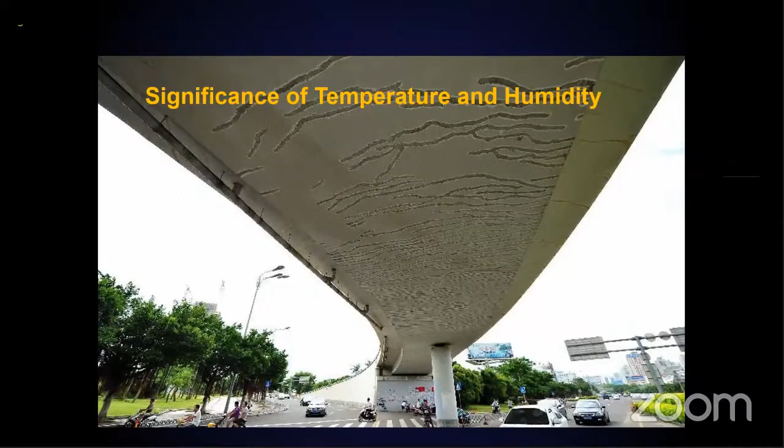So we also know the importance of temperature and humidity, and I've told you about various situations. Now there is also a typical known major potential damage to the structural element of simply supported bridges. Extensive studies done in the US, in Texas, have come up with a report stating that the combination of clogged joint condition and unpredicted thermal stresses could actually deteriorate the bridge because of local buckling that happens, and other issues related to temperature variation as well as clogged expansion joints.

You can see buckling of the girder flanges, spalling of the abutment, and deck cracking. These are primarily seen because of the temperature and because of clogged expansion joints. So we have understood now the importance of both temperature and humidity.

Now let's look into the case study on understanding the need for adequate performance. As you all know, there was a disaster in 2007, the failure of the I-35W bridge over the Mississippi. There were 13 deaths and 144 injuries, and you know the major cause for this. This is a video that is floating around.

I'll skip this and get into it. This particular bridge had very well documented investigation protocols. It was investigated yearly, then quarterly, then monthly post its construction in 1967. It was monitored regularly by various teams over a period of time, and they were rated as poor but not critical.

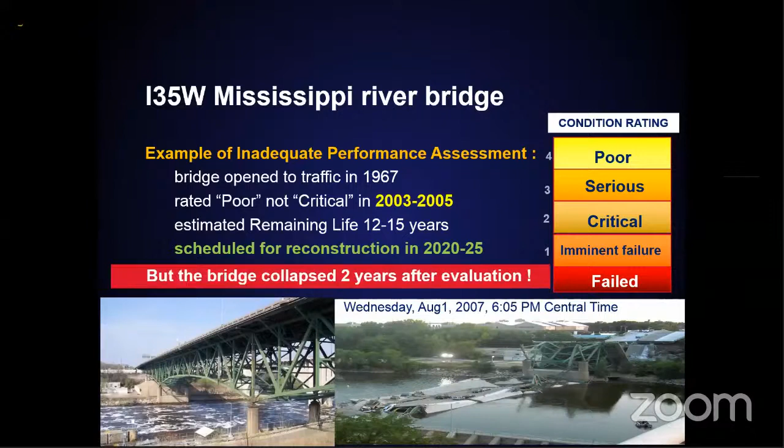This structure was non-redundant because of a design issue. Second, because of inspection and other factors, they rated it poor but not critical, due to changing inspection teams. Each team had their own perspective and subjective analysis, with various uncertainties involved. As usual in any civil infrastructure, we can't easily predict failures, but we can estimate the probabilities of failure.

The structure failed, and this was attributed in the final report to the bent gusset plate, and the deterioration that caused the bridge to come down. So, as you all know, ultimately we lost the bridge.

But recently, this month, there was a failure in one of the bridges in the USA. I'm going to go into this case study. Previously, we understood that although monitoring and inspection were done properly, we still lost the bridge. But recently, a bridge was investigated and found to be unsafe.

Let's look into this case study to understand the need for monitoring temperature and humidity, not just the structural parameters of the bridge. This is Interstate 40, the I-40 bridge over the Mississippi River. It was shut down indefinitely, and it's still not known when it will reopen, due to a crack found during a routine inspection on Tuesday, May 11th, this month, 2021.

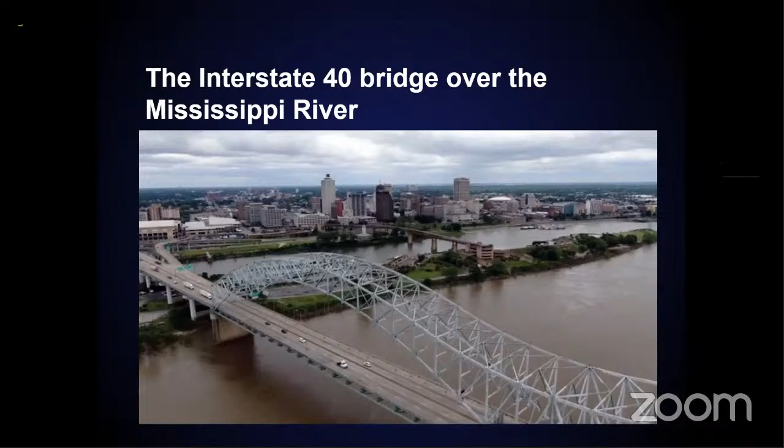The day I agreed to give this presentation, I was reading the report on this. Luckily, that's why I tried to formulate this presentation, and that's why it took so much time. This is the latest on the Interstate 40 bridge over the Mississippi River, you can look it up and Google it. It is presently shut down, since May 11, 2021.

There is a video which I can run through if there is time. Okay, let me run through it.

This gives you the basic idea of this bridge. It was opened in 1973, and was designed for a traffic volume much lower than what it carries today, subjecting it to much higher loads. It is subject to fatigue loads, not necessarily from traffic, but also from temperature.

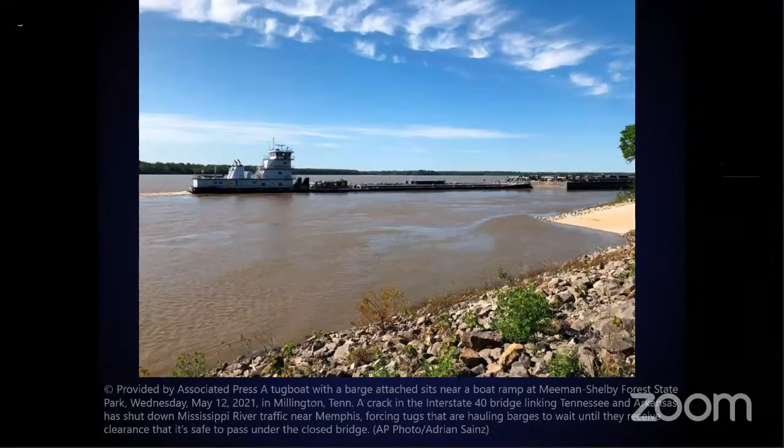Because of the initial investigation, they found that the structure had some deficiency. What they did is they tried to close down the bridge, and everybody who was involved, including the coast guards, also closed down the waterway underneath the bridge. These are some slides showing the present situation, and the traffic was diverted because of the situation on the bridge.

Prior to this closure, there was constant monitoring taking place, and routine inspections were done. The number of vehicles that crossed was about 41,000, and 30% of that traffic was commercial trucks.

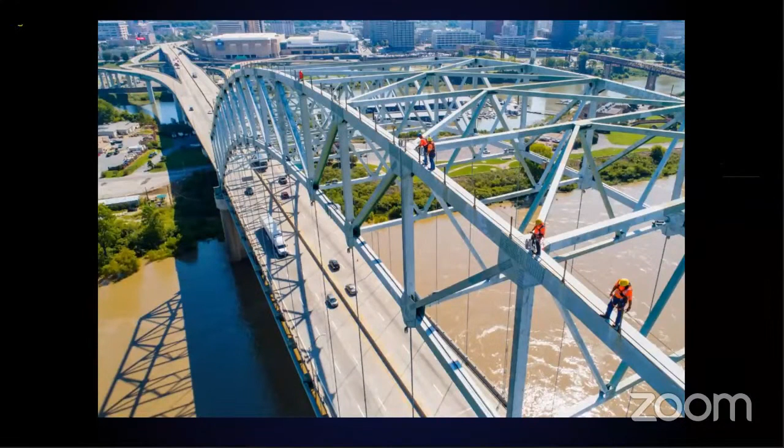The bridge was inspected regularly, and during the inspection they found a major crack, which was reported. The inspectors took immediate action and the bridge was locked for traffic movement. The crack looked mostly like a fatigue crack due to thermal contraction and expansion, in addition to the dynamic load from vehicle traffic.

One of the factors about fatigue development is that the fatigue crack can be initiated and propagated at stress well below the yield of the particular material. It's not necessary for it to cross into plastic deformation - it could be within the elastic deformation range, but it will definitely undergo fracture.

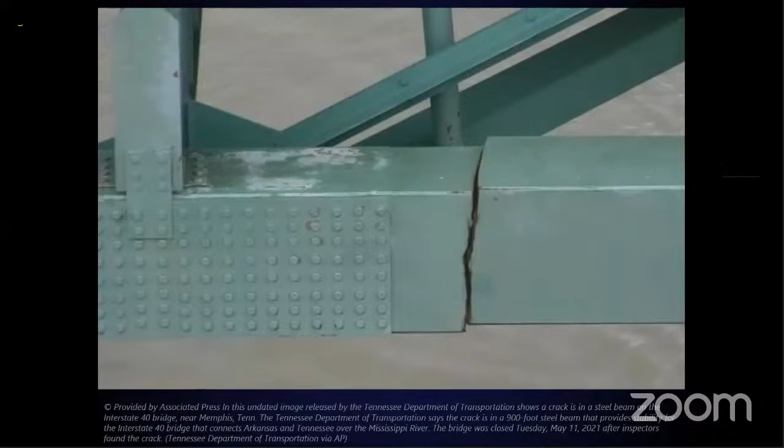You can see here the critical beam of this structure was fractured and is completely sheared. What you're seeing is actually a box beam, and if you are bridge engineers, you'll understand why the box section is provided at this point - it gives you a clear idea. This particular steel box is cracked, completely sheared, and broken into two halves.

The critical beam was fractured very close to the support. As you can see, there is a joint - bolted on here - and there is a crack over there. From the photograph itself, you get a clear idea of the extent of the corrosion that has taken place and the time it would have taken to develop.

There are several factors that influence fatigue strength, including the range of stress - dynamic stresses - and the geometries or static reversal stresses. The geometry of the component is very important, along with material property and environmental factors. For fatigue properties, what a designer typically does is increase the thickness of the component to make it fatigue resistant.

But you should also note that increasing thickness can result in failures being brittle rather than ductile. In most civil infrastructure, we expect ductile type failures, which is why we go in for under-reinforced structures. That is a note you should remember.

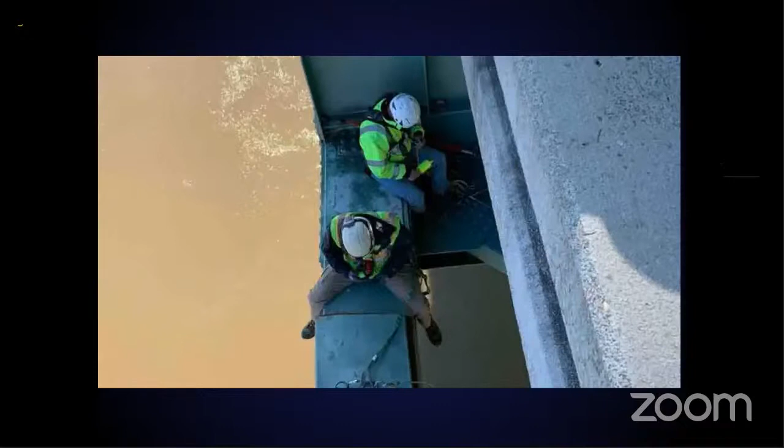When I was observing this, I thought of getting into my fundamentals and understanding the situation. You can see a few workers inspecting the cracks and how this would have happened. Now, by the experience and various situations I've gone through...

By these situations, I have understood that numerous investigations indicate temperature is a critical source causing variability in vibration properties. Most of the vibration studies I've done on bridges show that modal properties are not just influenced by loads, but more by changes in environmental conditions such as temperature.

So even if there is damage, it cannot be easily captured by sensors or structural health monitoring schemes, because the variation in modal frequencies due to temperature itself is quite large. This shows the importance of performance assessment, and the importance of monitoring temperature and humidity for any type of situation like this.

So understanding this, taking the failure studies, we have understood the importance of temperature and humidity. Therefore we'll look into two of the projects that I've done, and I'll run through the slides.

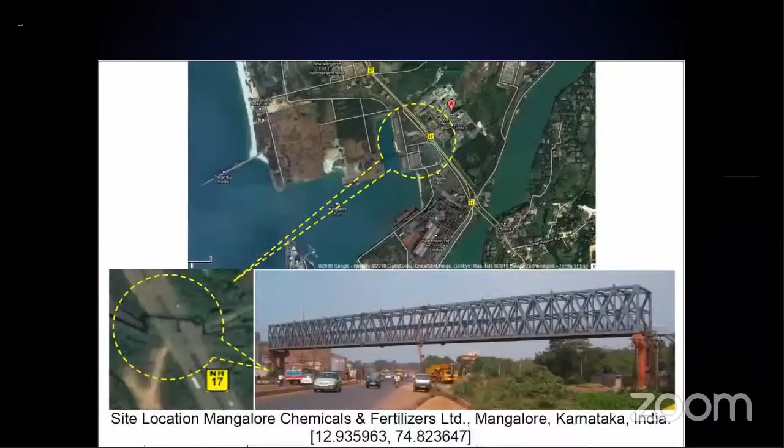This is a project in Mangalore, a steel bridge. Same situation - we were given the site and asked to install sensors and monitor, because their objective of monitoring was different. But what we captured was quite astonishing, and I had a complete insight into structural monitoring. This was one of the first projects where I made silly mistakes and was able to understand better, getting better insight into structural monitoring.

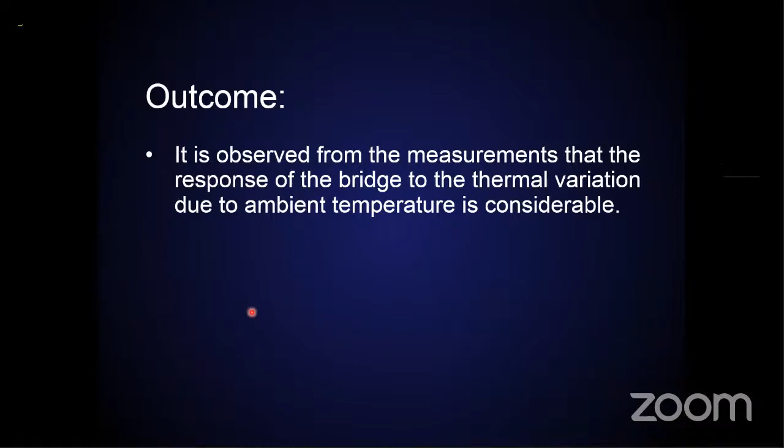You can see the variation because of the weather itself over a 24-hour span - why the tilt is changing, why the deflections and strains are changing. You can see the correlations between the temperature and the strain happening on the bridge. The outcome of this was that it was observed that the response of the bridge to thermal variation due to ambient temperature is considerable. This was the first report, already published to the clients.

So you can always refer to this if you would like to know more - this is with the MCF, Mangalore.

Now, the measurement at the bearing location - the objective here was quite different, I'll skip all those objectives. We also noted that it needs to be monitored for corrosion and the impact of being located in the corrosion zone. We need to also monitor the temperature as well as the humidity continuously.

We also updated the designers that structures are quite complex, and the influence of temperature is one of the essential factors in the design process. Such temperature stresses due to temperature variation have a great impact on structures. As we all know, whenever we design a structure, we use uniform distribution, whereas in reality, because of the non-uniform temperature gradient, there is going to be major change - stressing and strain that happens, and fatigue that is going to happen, and therefore there will be maximum changes in the structure. This is rarely considered in detail, so we also updated the designers - I think these people are Jacobs.

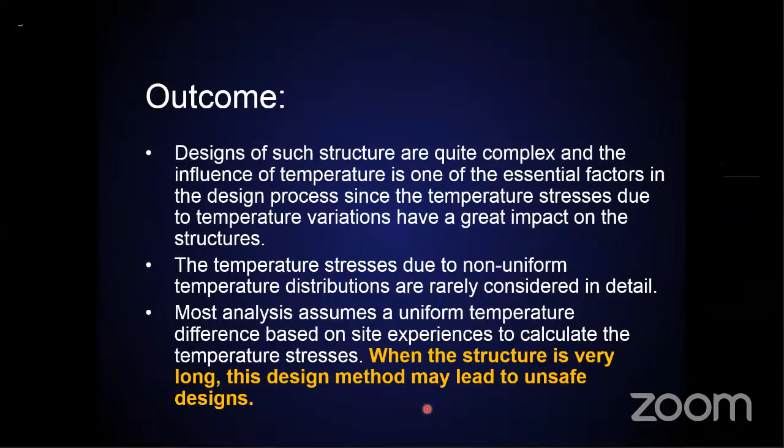We also emphasized the corrosion point of view, and the inspections that need to be done regularly based on anticipation and experience. You saw already the bridge that was monitored but failed without any notice, and it was visual inspection, not sensor-based inspection, that was able to find it. As I said, the fatigue failure was not because of traffic loading, but because of temperature. The next situation is the online monitoring of the Neva bridge.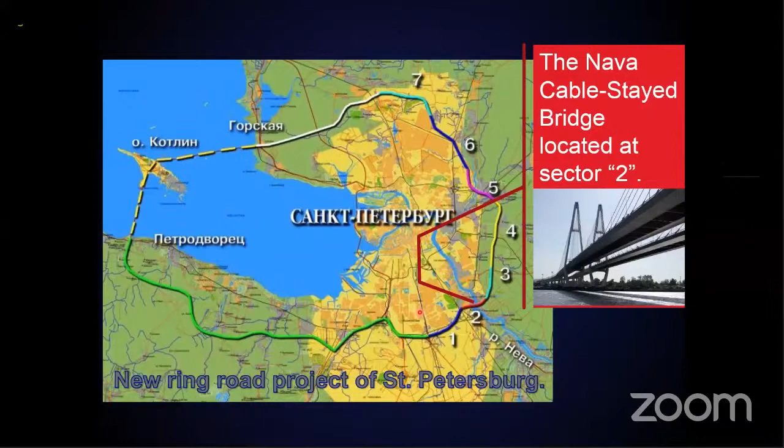This particular project was allotted to us from the commissioning and construction stage through to the present day. This bridge is located in Russia. As you can see, I'll run through this. It's a dual bridge, a steel twin bridge.

Because the twin bridges are close to each other, the aerodynamics is quite complex, so an aerodynamic study was done. These are the designers of the bridge, with the span and geometrical details provided here. It's a beautiful bridge, worth watching.

The traffic has 4 lanes on each bridge, so one-way traffic on each. This bridge is quite complex aerodynamically - understanding the aerodynamics and the coupling effect between the towers, since air passes between the towers, means aerodynamic coupling has a major impact.

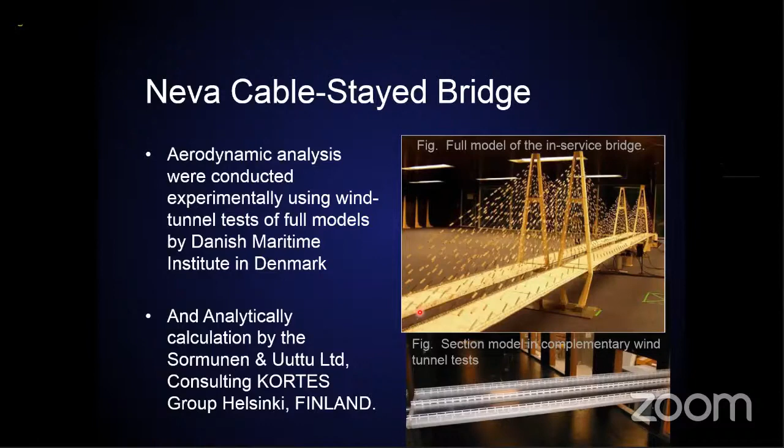Therefore the analysis had to be done using a wind tunnel, and the same had to be monitored on site. Because the temperature in Russia goes from below minus degrees to the highest degree, it had to be constructed on a tight schedule, for which steel structures were chosen.

As you know, steel structures are lightly damped, so other issues come up with lightly damped and slender structures - the dynamic nature of the structure has to be understood. The aerodynamic performance of the deck needed to be understood, because the design was done to satisfy aerodynamic requirements, so the dynamics is quite different.

If you look at the wind dynamics, there's a chimney next to the bridge site, and you can see how the wind direction changes constantly, with quite high wind speeds. During construction, the cantilever was moving up and down almost 10 feet.

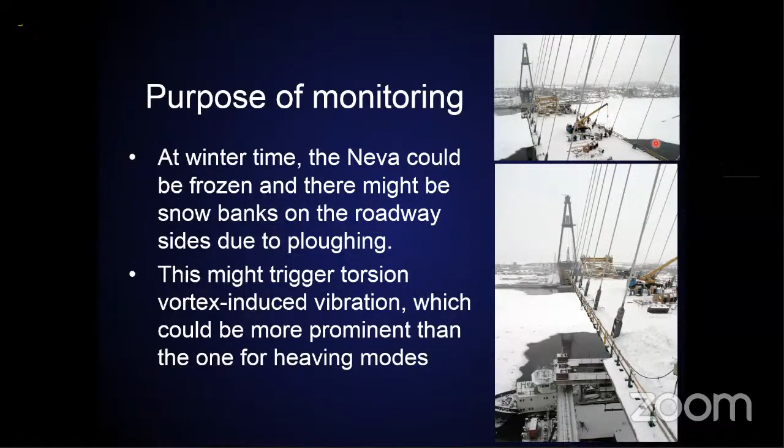During construction there was the worst snowfall, which was not anticipated even by the designers, resulting in the worst loading onto the structure from snow load. Because of the monitoring, they were able to trace how much stress was getting into the structure.

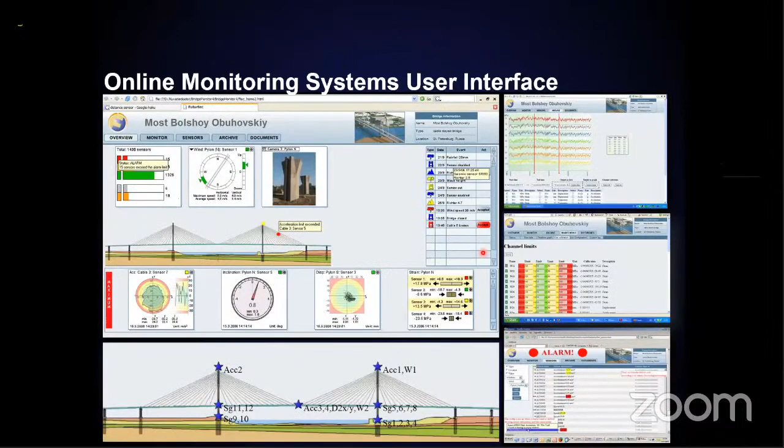There were various web pages or sub web pages that could be opened, and we can see what is happening with each of the sensors. So what are the findings for this very large, long span structure?

Temperature and humidity are very, very important - the variation of temperature affects the vibration properties of long span bridges, which is very complicated and important to note. The temperature distribution and variation are generally non-uniform and time dependent, including changes of physical parameters along different parts, and this is completely asynchronous.

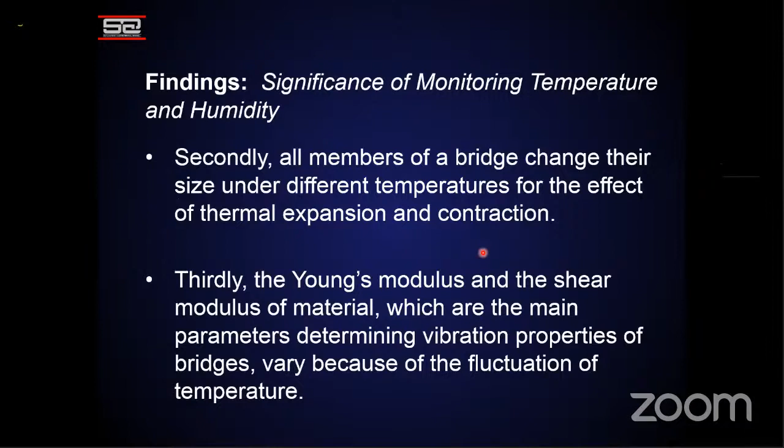Secondly, all the members of the bridge change their size under different temperatures, and the contraction of each and every individual member is going to be different. Third is the Young's modulus and the shear modulus of the material, which are the main parameters determining the vibration parameters, and these also fluctuate because of the fluctuation of temperature.

Fourthly, daily and seasonal variation in temperature may change the stiffness of the bridge joints and supports, thus strengthening or weakening these constraints, resulting in an apparent shift of the vibration properties. Sometimes we are not getting the true properties if we are just monitoring vibration properties alone, because temperature and humidity play an important role.

Lastly, temperature variation results in considerable thermal stresses or stress redistribution in the structure, which changes the vibration properties of the bridge. This case study indicates that temperature is a critical source causing variability of vibration properties of the long span bridge, and variation of modal frequencies caused by temperature in most cases exceeds the changes in frequency due to structural damage or deterioration.

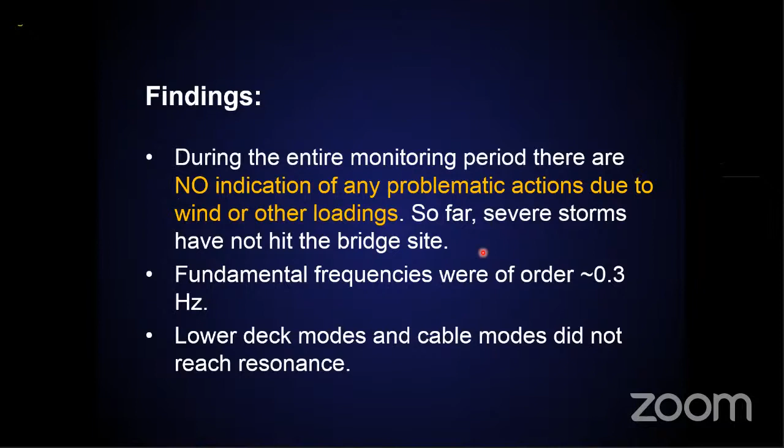We also found through monitoring that there was no problematic action due to wind, and the fundamental frequency was within the order of what was calculated. The wind speed and other parameters did not, in the real scenario, cause any resonance. So this was the finding of this particular project.

This structural monitoring technology and system has been used to facilitate sustainable development through improvement of the knowledge base, reliability, and safety in the design and assessment management for structural infrastructure. This particular data is presently monitored by the Russian Ministry of Emergency, and the data is being utilized by various academicians and related people, who have been developing the knowledge base.

So a few closing comments before I close this presentation. Basically, from this presentation, you should understand that structural monitoring technology is the inverse process of structural design and verification, reflecting the variation of structural material parameters and geometrical characteristics, which is a change of structural response due to various environmental factors also.

Many field monitoring data indicate the structural response is not only related to the characteristics of the structure, but also highly susceptible to environmental conditions. Most of the monitoring cases we have seen are highly susceptible to the monitoring environment. So basically, you have three cases in basic engineering: output analysis, input identification, and system identification, or structural identification.

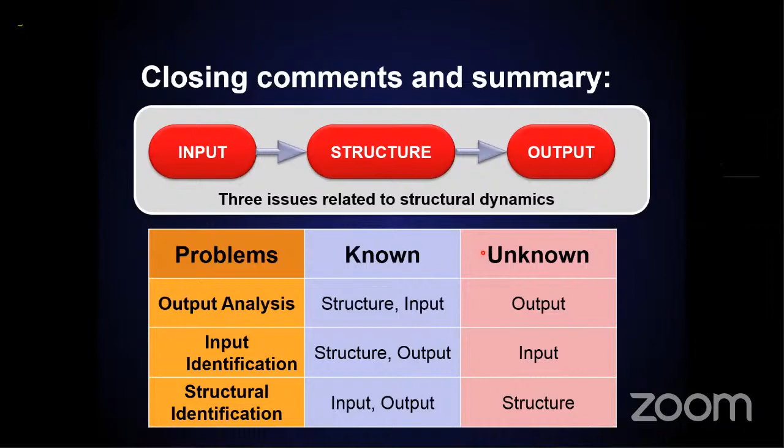In structural identification, you have the unknown parameter of the structure, and you know the input and the output. That means you know what type of input is going to come into the structure, and what type of output is going to come from the structure. If you have this, defects in the structure will inevitably change its dynamic characteristics.

These changes may be detectable by dynamic loading and sensors. Whatever defect happens in the structure can result in changes, and the dynamic characteristics can be detected by the structural health monitoring scheme. Obtaining accurate dynamic characteristics and developing an accurate theoretical model to study the performance is perhaps the most challenging part, and the structural health monitoring scheme helps with this.

Basically, you take an input source, that is free vibration, forced vibration, or ambient vibration, and your structural system is completely equipped with a structural monitoring scheme. You get the dynamic response, and through dynamic data analysis or big data analytics, you check what is happening with the data, and try to extract the features, or do a statistical assessment of the data to get the features of the trend that is happening.

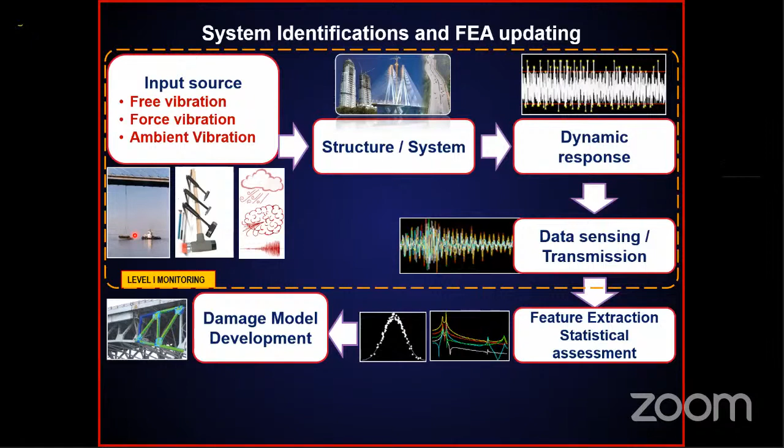And therefore you try to develop a model. This is called system identification, which is a methodology for building a mathematical model based on the system dynamics, using the measured data of inputs and outputs of a signal. So you have the inputs and outputs of a signal, and from that you develop a model, and this process is called system identification. Since this identified system is closely related to the system in reality, you get to understand the future performance of a structure if you use these updated models in your analysis.

This is a scenario we are present day in, which forms the basis for system identification and FE model updating. The future response of the system is studied for damage assessment and critical condition based on data using SHM. So you have a system in place, you've already updated your model in software using this data, and you've got a reliable FE model. You input the present day situation in real time and get back what is going to happen progressively, making a detailed study encompassing various uncertainties, giving you a more reliable understanding of the structure.

In summary, there are 3 stages of SHM. You acquire data using sensors and acquisition systems, and from this data you develop a dynamic model - this is called system identification, done through data extraction and feature extraction. From the data, the model is developed, and you input sensor data to get condition assessment using the updated model, as well as inputting realistic or future sensor data onto the model to get the condition or performance of the structure. As you know, the effect of change in environmental condition or dynamics is going to change the dynamic characteristics of the bridge.

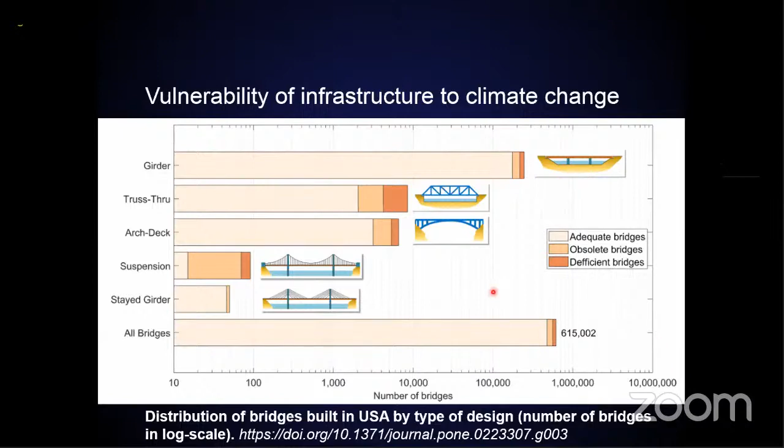Today we are in a state where we're not just monitoring the data of importance, but also monitoring other conditions that affect these. This technology - temperature-based system identification and temperature-based structural health monitoring, or structural temperature-based structural monitoring - is presently being accepted and practiced. But all this while we were doing it without looking into those factors. Presently it's already well developed, with a lot of algorithms already developed, and people are looking into this data.

From temperature-based system identification and temperature-based structural monitoring, the measured values are just temperatures, temperature gradients, strains, and displacement - nonlinear and linear analysis of the measured inputs and responses based on characteristics of the observed value, and the final target of this structure identification, prior to the finite element updating. So basically what you do is monitor all parameters of temperature, environment, temperature gradient, stress and displacement, non-linearities and linearities, observe the trend, and then develop a system or model using these temperature or environmental condition based inputs. This is already in books and literature, and already used in various studies in well-developed countries, as well as where people are extensively using structural monitoring.

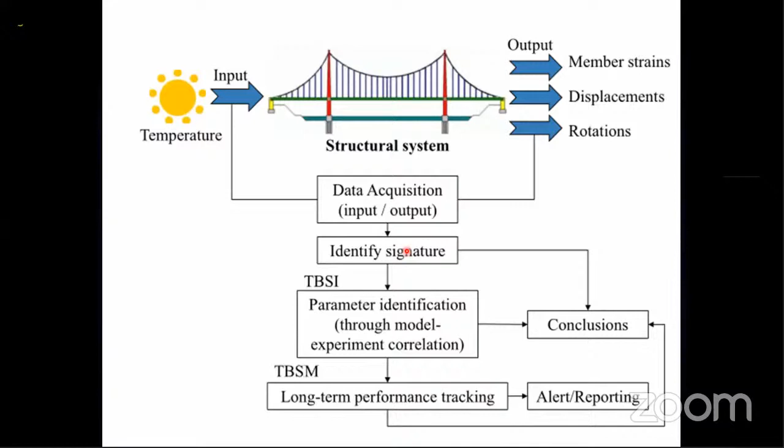As I said, I emphasized on the environmental temperature and relative humidity. This is the input that is also taken care of by the structural system. Then you get various types of responses, you acquire the data, you identify the signature. Using the temperature-based or environmental condition-based system identification, you can develop the proper model of it. Then by continuously monitoring further, you can see the long-term performance of the structure, and come to some conclusion. This is the present day trend that is happening, and that is real - everybody is going with temperature-based structure identification and temperature-based structure monitoring scheme.

So in conclusion, the data and information obtained from structural monitoring scheme offers several contributions. That includes the result can be used to evaluate the safety and serviceability of a bridge by comparing with the design criteria. The results can be regarded as a set of reference data serving to eliminate the effect of environmental parameters in evaluating the condition of a bridge.

As we all know, for example, in assessing the effect of the traffic load, the temperature effect should be removed from the original measurement. The quantitative effects of the environmental parameter on structural response can be employed as a damage indicator. If the expansion joints or the abutment is completely or partially restrained for longitudinal movement, the measured displacement will show different parameters, so that we know very well.

So I thank you all for your patient hearing. It was quite a vast topic that I had to cover, and since this was a COVID situation, I took an opportunity to put all the information that I had gathered over a period of time with my experience, as well as with a lot of reading and looking at present day articles, like the traffic that is being closed on the I-40 bridge.

So I had to put it in place and present it in such a way that it's quite understandable by most of you during this online presentation. I hope that my presentation was quite reachable to everyone, and that it was quite understandable. I thank you one and all for your patient hearing.